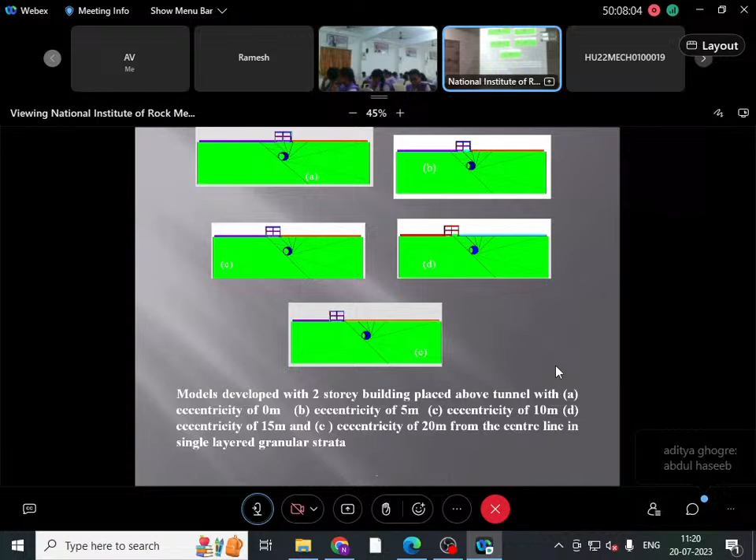To 7 meters a tunnel is passing through, so problems are too many. We need to assess whether the tunnel is going to stand, or the structures above the tunnel on the surface are going to stand or not. These are the issues wherein we need to divert little attention and then do something.

Without numerical modeling, nothing can work in civil engineering designs nowadays. So I expect my civil engineering colleagues in GITAM, and mechanical also, to now divert towards research in taking up projects using numerical modeling approach. Every project, every consultant in India is using numerical modeling for designing the structures.

You can find that some 3DEC there. This is the most advanced version of distinct element modeling software. I think NIRM is having it, and then we at NIT Surathkal got it. I think more than a dozen MTech projects were produced and 3 PhDs or so were produced on this. NIRM continuously uses it, and they generate crores of rupees worth of consultancy.

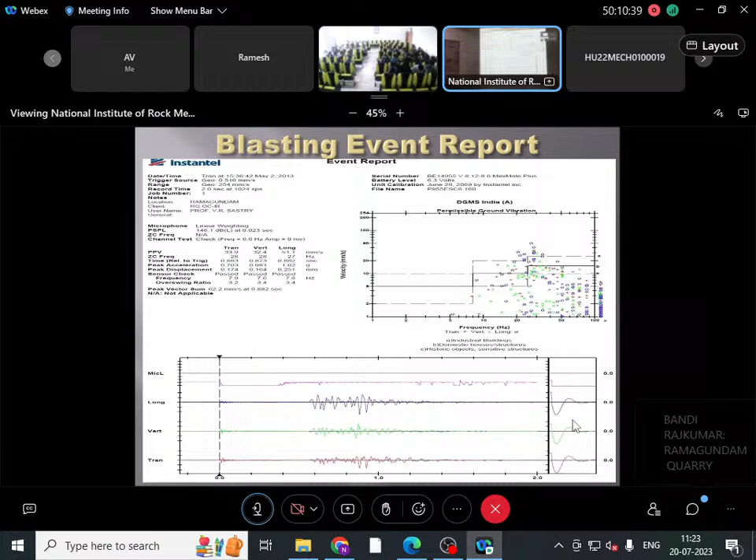How to control? So stability of the structures, or protecting the structures from ground vibrations generated, is a big area of work with huge consultancy potential. We have been working on that for the last almost 3 decades plus.

Now another area is how much energy is going to be generated by these vibrations. Can some energy be generated and stored to run your computer systems, at least in the organization, from the vibrations? We are working on that based on piezoelectric based electric generation, power generation.

The next one is high speed videography, because when you talk about a blast, everything happens in a fraction of a second. But everything also happens within that fraction of a second, and that may be good, that may be bad. For your information, I will just give one example.

In some of the mining projects in Northern India, Northern Coalfields Limited, one single blast - you see in movies, no? In the climax, villain wants to blast the structure or factory of the hero, and somehow hero does all the fighting, and at the end of the day he stops the blast. With the press of the button of that exploder, you are going to execute a small amount of plus 1.5 crores only. And the bill of explosives of Coal India Limited alone, one organization, exceeds 10,000 crores a year.

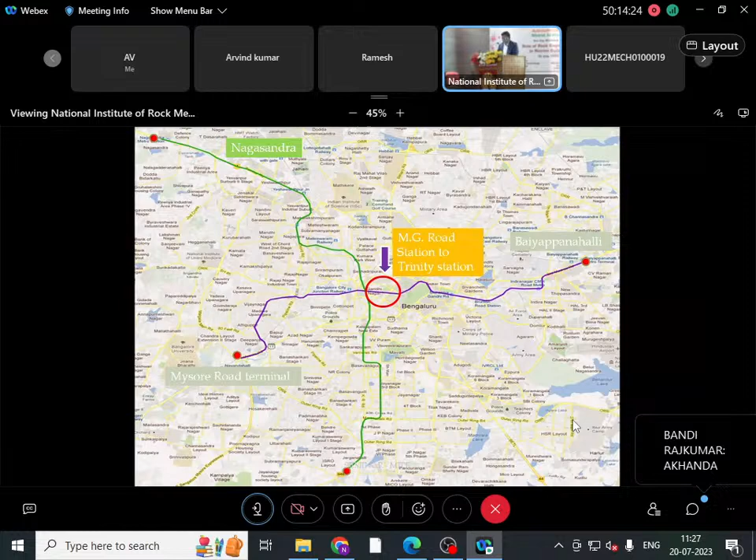This is Hindustan Aeronautics Limited building. On one side you have the HAL building. On the other side you have GPO, General Post Office, constructed by the British, which is declared a Heritage Center, a masonry structure. Excavation was done to construct the underground metro station.

One more piece of information I would like to share is that all the metro stations in Bangalore have a different design. No two stations will be of similar structure or similar design. The general architecture, how it should look outwardly, was designed by students from engineering colleges in Bangalore.

BMRCL floated a competition, and students gave the design for how it looks outward. So that is where we are progressing, how we are progressing in the country.

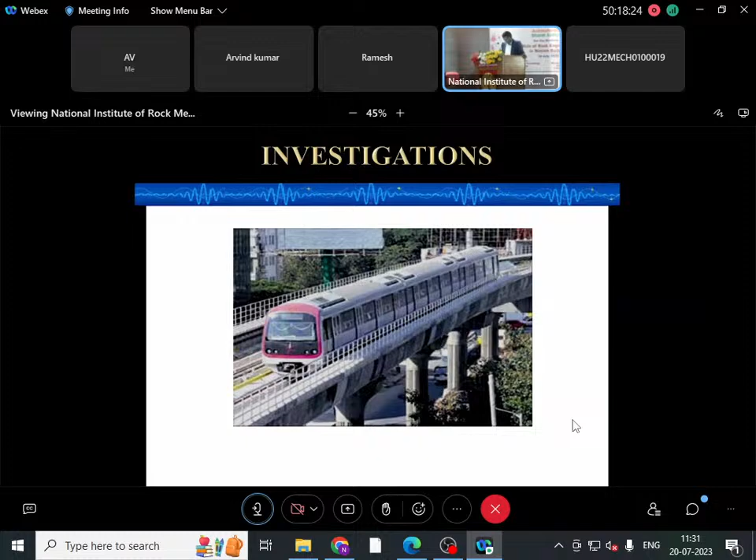And Munnar, everyone knows for something, but Munnar holds one of the toughest hydroelectric power projects, wherein maintenance of the slope is a big problem. NIRM was involved; 3 times they had to change the direction of the tunnel. Almost 600-700 crores has gone down the drain. Root cause: we don't really have the expertise to deal with the problem.

So friends, numerical modeling, these are some of the problems. Then when you come to the port sector, all the ports are going for tremendous expansion, deepening of the ports. If you have more depth of water, you can invite large capacity ships. One of the pet projects of the present government is to expand the ports.

When you go for expansion, you have to excavate the material. If you encounter rock mass, you have to blast, and we blast from a distance of 2 to 3 meters. Below this, there are piles supporting the structure. So 2 to 3 meters from the structure, blasting has to be done, protecting the structure, which is worth around 350 crores roughly, per structure. So the stakes are too high, and we don't have experts—only some 2-3 experts are there in the country.

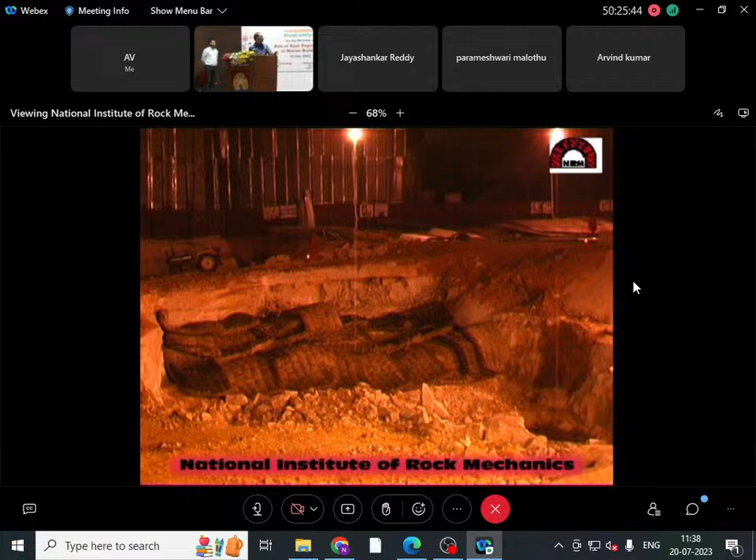This is called controlled blasting. Split.

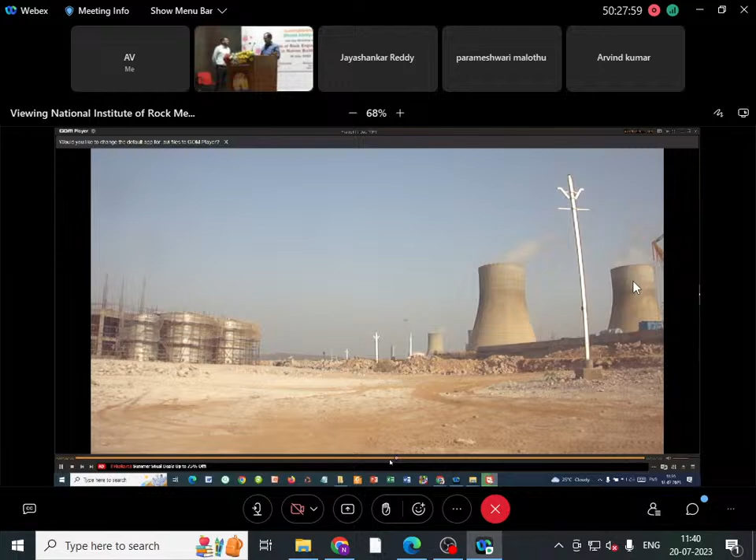This is at a nuclear project in Rawatbhata, Rajasthan. This is a specialized blasting called pre-splitting. Result of the pre-split.

Now the blast, what I said, pre-split blasting, there is nothing like you need to see any rock movement or anything, but this is how it has generated a crack within this. I will show you the result in my lecture. That means it is only creating a vertical face without damaging any rock mass, so that we have 15-20 meters of vertical face. This is a specialized blasting. This is how a crack has been created—even the blast hole has not been damaged. So this is one form of controlled blasting.

So rock blasting, I will take up, probably another half an hour to 35 minutes—rock blasting, a tool for development.

Now what do we mean by development? Development is something which can create a resource for the sustainability of the nation or an individual. Here, I have shown you the Chennai airport—the Indigo aircraft standing at the Chennai airport, this is probably 1.5 years back. The adjacent building is where we have done control blasting, and then this is terminal 2, which was inaugurated about 3 months back by our Honorable Prime Minister. That means airports are constructed, your travels are enabled when we do excavations, and excavations are done through hardcore blasting.

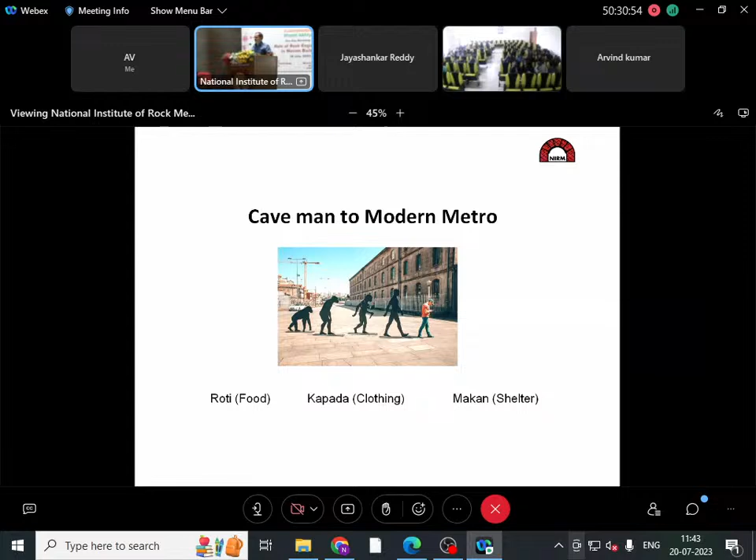Now what sustains society or the nation, broadly I have put it for you, is mining and agriculture. What cannot be grown has to be mined. So mining sustains the society, and to sustain the mining, to build the nation...

It enables you people to make your software. Those in computer science or electronics make the tools, ADAS devices, to put on your car, which is made of metal, is what sustains the society. Health, education, knowledge, information and data.

Today education is the last one, data is the first one. The priority of every individual is analysis and handling of the data. What kind of data is of no relevance to us? Infrastructure and energy. This gives us...

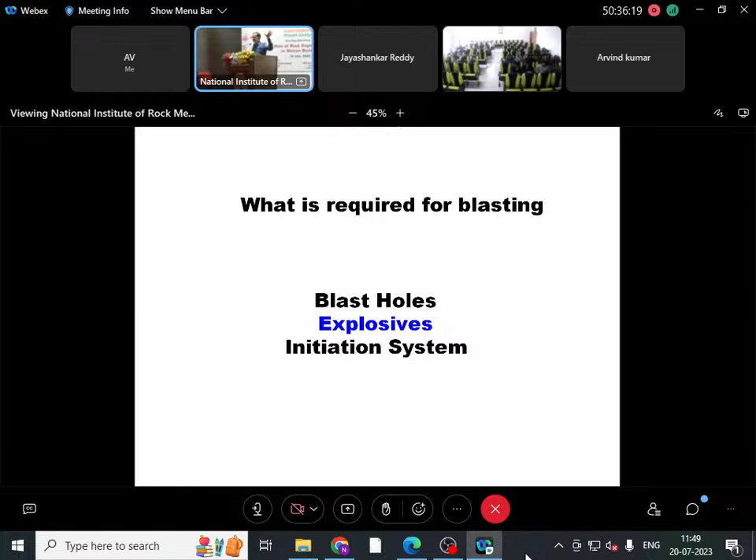So these are the three requirements: you need to have a blast hole, you put an explosive, you need an initiator to trigger it. Once having got these three things, the small thing you have to look at is the distance you have to keep that blast hole away from another, called the burden, spacing and the bench height. These are the terminologies, I am not going to go into detail. So this is called the design aspect of the blasting.

Now for this is a mining slide. The entire blasting has been put in these 4 slides. If you have a blast hole, you can have a blast hole diameter of 38 mm up to 311 mm. If you imagine a 311 mm blast hole, the explosive that can go into a single hole of a 40-meter bench will be almost around 1.4 tons. And if you are blasting almost around 100 holes, it can be more than 200 tons of explosives at a single time. So this is the size of blasting that we handle in India in the mines, and in a small project, as you have seen in Bangalore Metro, that is all 38 mm diameter, we are using 1 kg, 2 kg explosives. I will not explain more into this.

I don't know, online audience, if there are mining people, they will miss it.

When you do blasting, what are the issues that come out? The issues are design issues, that people will say the cost of blasting is high, that is an economic issue. The other one is technical issue. We are having huge boulders which are not able to be further used down the line, that is one part of the technical. What is the other issue? The adverse impacts. Whenever we do blasting, one is techno, economic, social, environmental, legal. This is where we spend a lot of our time in convincing when we do the blasting.

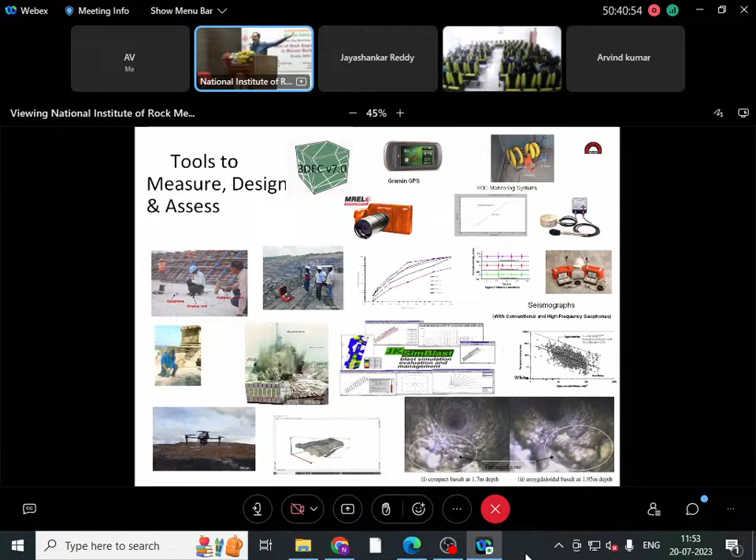How do you tackle this? Like all of you have computers, we too have computers, we too have tools, we too have electronic engineers working on this. These are the gamut of instruments that we use. I have shown the entire system of tools which we use. We understand the rock mass by having the sonic velocity of whether the rock or the concrete. We have modeling softwares, distance measuring units, high speed cameras, fragmentation analysis tools, vibration analysis tools, explosive analysis tools, air over pressure monitoring systems, and we do have empirical and numerical equations to come out with results. We have got borehole cameras to see what exactly the crack propagation is. We have got three-dimensional analysis, and then we use drones to completely capture the blasting in real time. So it is a matured engineering field. Rock blasting is not something where you just put an explosive in a hole, connect it and blast it. All this goes behind it to come out with a successful blast design.

Now this is how we monitor it - it's a hardcore blue collar job, it's not a white collar job. You have to be at the field, you have to take a lot of dust and heat in the hard helmet area. Now I'll show you the learnings.

So there is something called the stemming length, stemming material, and the initiation system. These are the technical things we consider when we design a blast.

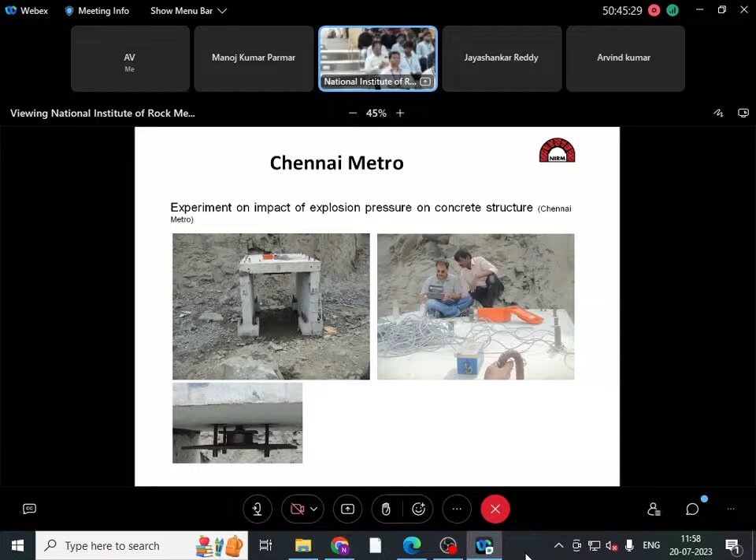Now, when I said that the effect of vibration is there, there are certain standards we need to follow. When you do blasting, we generate a calculated intensity of vibration. We say what is the permissible limit, our design will incorporate, and it will not generate more than that intensity of vibration. So that we call charge per delay, which we control and use.

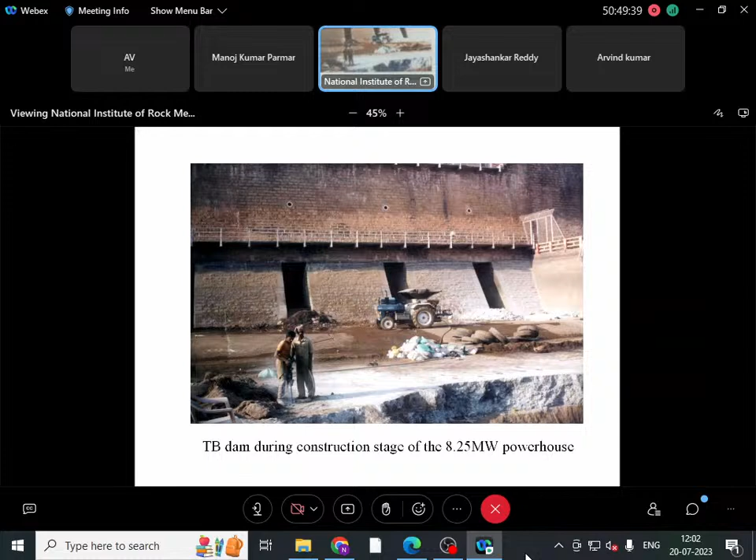This is in Bhutan. It is a 1020 megawatt Tala hydroelectric project. The cavern that Shastri Saab showed, the orangish one, the big cavern, is from the Tala hydroelectric project. And this is the dam of the Tala hydroelectric project.

They wanted to augment 25 megawatts more. Each megawatt of power generated today costs almost 7 crores per megawatt. So if you have to generate 25 megawatts, it comes to around 25 into 7, around 200 crores. But we spent only 25 crores, and another 25 megawatts of power was augmented by making a tunnel on the abutment of the dam itself. This is the dam abutment. On the abutment of the concrete dam, we have done controlled blasting.

This is the Punatsangchhu hydroelectric project in Bhutan. There was a huge fall, almost 190 meters, and almost 2 lakh meter cube of rock mass collapsed. Now there is no access to this. We created an access from the top, from an alternative route, and then completed the project.

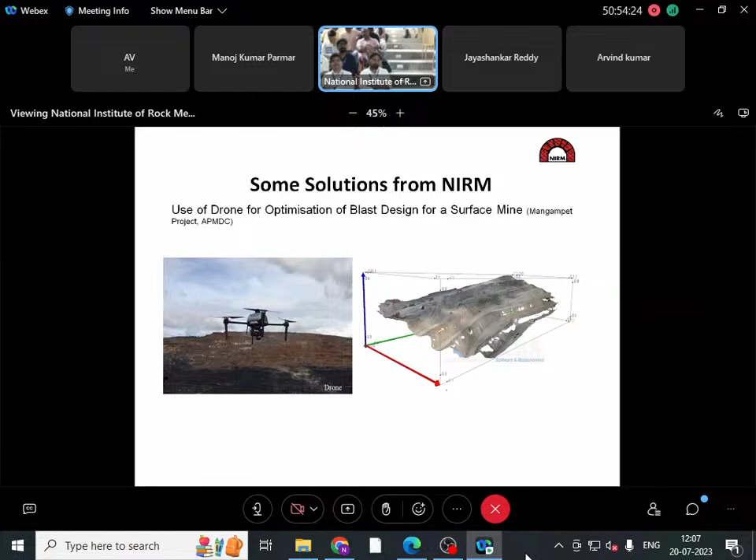What to do? I am talking about 2002. We thought, can't we think of pop shooting? Pop shooting means you place an explosive abutting the choke, it will blast and fall down. But it's risky - you have to climb into a 3-meter hole. We don't know what is going to come on your head, but who will take the risk?

Then we said, projectile charge. Why can't we think like army people, when they project it, it can hit it. So we can devise a projectile charge. We thought about it. The other option was drilling from the shaft bottom, or creating a new access.

We did not, like how Dr. Venkatrama has said, fear the failures - we make it a learning. We said, okay, this pop shooting has failed, let us attempt the projectile. So there is something called in blasting where you have a charge, a shaped charge.

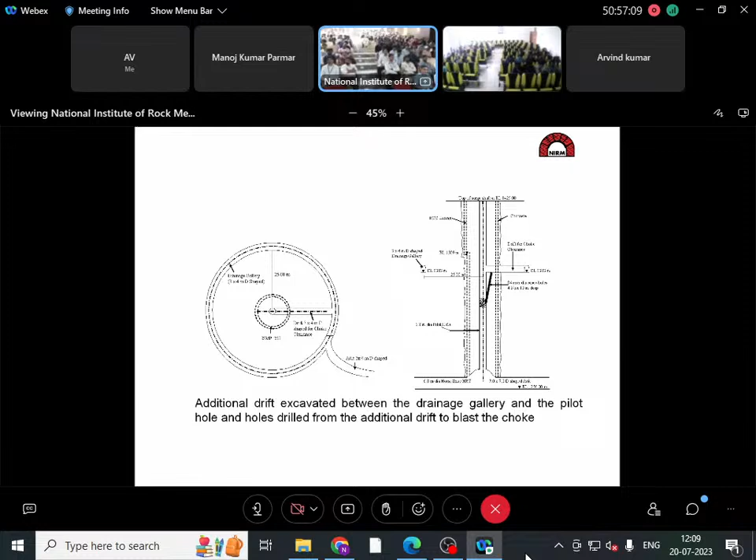Then we decided there is a drainage gallery like a tunnel access. From that you drill 100 meters and then address the blockage, because the entire power project of 5,000 crores rests on opening this choke, or else the project fails. That also was a difficult proposition. Finally, we identified an intermediate location, made a tunnel of 25 meters, went directly at the choke, put the explosive and blasted.

Now there is a heritage temple, Kumaraswamy temple, near Bellary, Hospet, where iron ore mines are located. Iron ore is a resource we have to judiciously use. Since there is a temple nearby, there was a Supreme Court judgment that within 2 kilometers of the temple, no blasting should be permitted. We said it's a national resource - if we can protect the temple from the blasting, what is the problem? So we conducted experiments, and today permission has been given up to 600 meters from the heritage temple, which is 1,000 years old. The temple is now safe and the mining is going on.

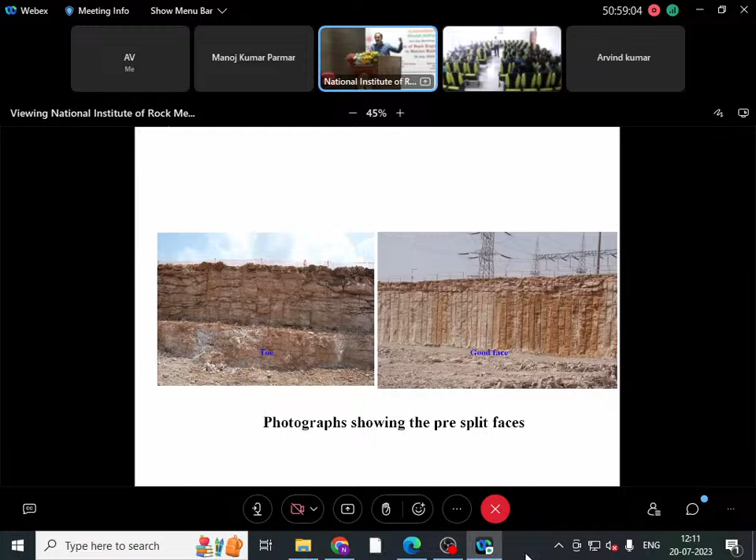This is the pre-split. The advantage with this is that if you have an angle of 70 degrees, the extra rock mass which has to be excavated will be almost around 8 lakh meter cube. Where do you dump that extra material? So to give a vertical face, you need a specialized blasting technique - pre-split is what that is.

This is one more experiment in Karnataka, near Hospet. There is a railway track going on top, and underground you need to make a tunnel. The cover is almost 14 to 17 meters. There was almost a 6 to 7 hour traffic jam with no solution. The railway people said they don't permit tunneling because their active railway line is going on, and the government was not interested in constructing a flyover. This was a logjam.

Then we convinced the railway people, saying we will do tunneling below this and will not generate vibration intensity more than what the trains generate. Trains also generate vibration - if you permit that vibration, why not permit blasting? They said, how do you prove that? We said we will monitor the train vibrations. We mounted sensors and monitored for almost a week, creating huge datasets.

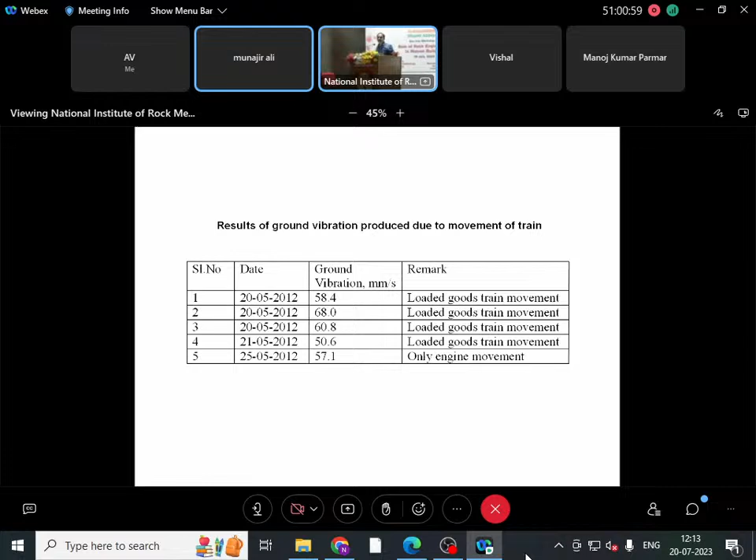The maximum intensity of ground vibration produced by trains was 58.4 mm/s, 68 mm/s, 60.8 mm/s, 50.6 mm/s, 57 mm/s. We said that with blasting we will not exceed 40 mm/s. Yes, done.

After that, every blast we used to monitor the level on top, checking for any subsidence or sinking because of the excavation below, since at a shallow depth of 14 meters this is a critical condition. We have all the data - the tolerance level we maintained was 0.005 mm, with the RL at 57.165 meters, and 0.005 mm is the tolerance limit at which we were working.

And the deformation measurements in the tunnel we have monitored. And finally, this is the blasting methodology we have used. Stage 1, that is the heading, side slashing, and then benching.

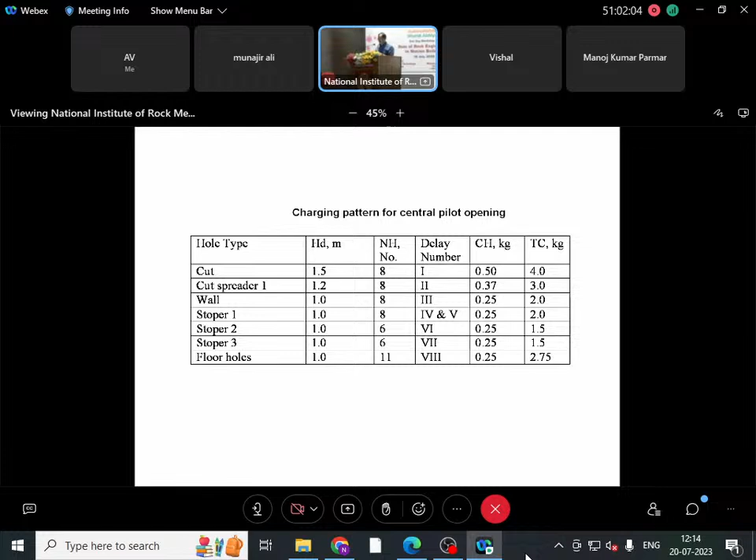These are the blast designs what we have used. These are the delay intervals given, delay number 1, 2, 3, for long delay we have used. The charge per hole and the total charge is given. The cut holes, spreader holes, stopers, floor holes, and final, this is how it started.

This is how it has progressed under the railway line, and today this is how the tunnel is completed. This is how the tunnel is completed.

I think Dr. Jha, I said 12:15. I rushed the slides, and thank you.

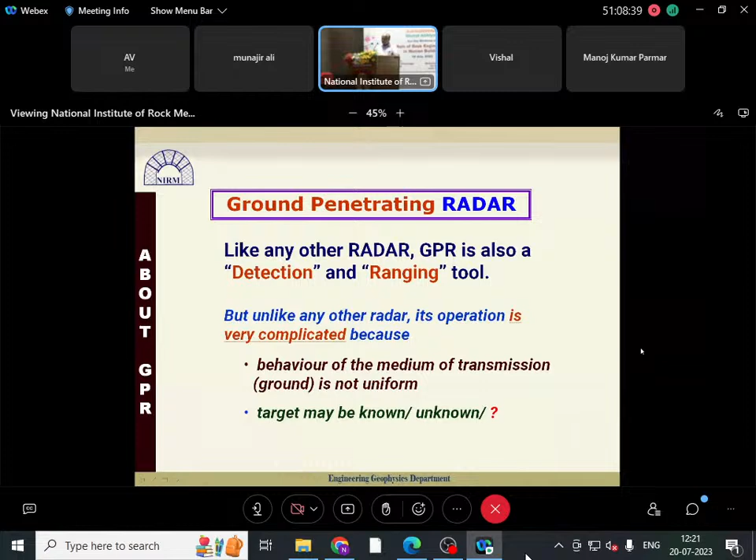Today it is one type, it has rained yesterday night, whole night, and today also it is raining. What data we got yesterday with GPR will not be the same today. The question here is, when the medium is changing like this, what can we detect? The anomaly is introduced by the medium itself, and now we are going to detect the target. That's what makes it complicated. But despite all these complications, we have to use it because it is a tool.

In geophysics, GPR is essentially an electromagnetic tool of investigation. Like any other electromagnetic tool, it has a source, that is a transmitter, which is an antenna. Then we have a receiver, which is a frequency-tuned coupled electromagnetic antenna pair. And we have a data recorder, essentially a PC, which records the normalized strength of the signal and the time delay over the transmitted signal reflected by the target.

So we are sending a signal and recording it back. What is the delay between the recorded signal and the sent signal? We are recording that delay. What is the loss of amplitude between the sent signal and the recorded signal? We are recording that as a normalized output. So these two things we record, and based on that we do the entire interpretation.

So where is the complication? It is all introduced by the ground. The ground distorts and modifies the incident signal, because while reflecting it, it makes the target blurred, since the ground is changing. Then there are some types of ground, like shale or clay, which absorb the signal, and then nothing reflects. So it becomes opaque, and we cannot work with GPR. We say GPR has failed, target is not detected.

There are also some targets like RCC or metal sheets which absorb the GPR signal, and there too the target becomes opaque. So these are the problems we face when we work in the field, and how we overcome that I will discuss here.

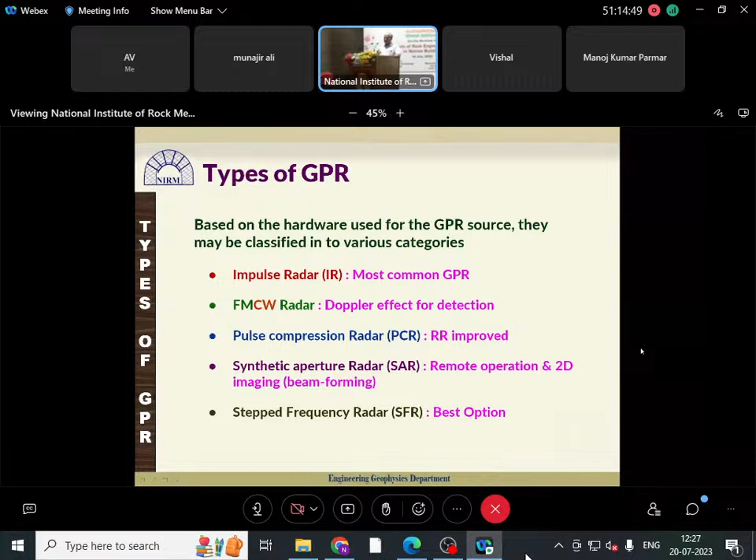Apart from that, people design radar as and when it is required. So what is the advantage of step frequency radar? Most of the limitations seen with conventional GPR are overcome with it. If we go through the literature, they say it is the radar of the future. But what we call the radar of the future, we acquired in 1995 at NIRM. Its hardware and data interpretation are difficult, a bit complicated.

The key to success of step frequency GPR lies in the design of high performance antennas which have ultra wide bandwidth with quick ring down characteristics - the design of the antenna, ring down characteristics, and ultra wide bandwidth. So if we carry one antenna itself, it will give me a range of 30 megahertz to 200 megahertz, which is not possible in impulse radar. That is the beauty with this step frequency radar. The ring down characteristic is very good, meaning it couples with the ground and gives me the signal in all possible cases.

The operating principle: we have a transmitter antenna and a receiver antenna. The transmitter antenna sends the signal into the subsurface and the reflected signal is picked up by the receiver antenna. Multiple reflections are picked up and data is stored in our computer and then displayed.

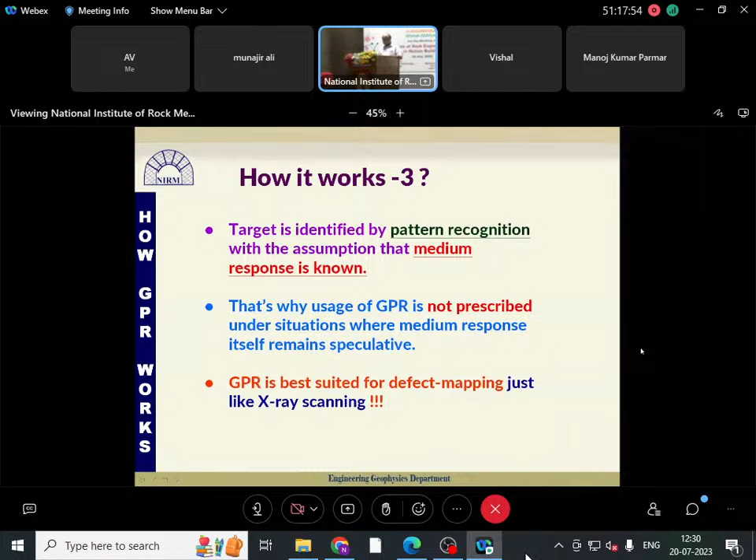The second problem comes with transmitter receiver coupling in GPR. This has varying subsurface conditions that lead to the success or failure of GPR. What happens? I have a practical example I will tell you. In this particular case, I had some survey work in this GITAM campus.

I had come when we had planned and said we will come. When I came here yesterday, it had rained. Now the GPR which I had planned will not work because the ground has become conductive. In this particular case, it will lead to failure. Now the question is, if I am an expert, I can still bypass that defective part and use the signal and come out with an answer.

But if you come with a conventional radar, it will definitely fail because the signal will not go beyond 5 meters depth, because for 6 hours it has rained - the whole area is drenched, nothing will go through. But if we bring an SFR, we can change our coupling frequency and get the answer. So that is where the TX-RX coupling with varying surface conditions is the key to either success or failure, both.

So antenna pattern varies with relative permittivity of the medium. It is expected that electrical properties of the subsurface should not affect the antenna performance, but that is not the case with impulse radar - it affects it. For effective coupling in the ground, good impedance matching is essential at the antenna and surface interface, which is possible only with step frequency. And this is often ignorantly ignored.

Why I am saying ignorantly ignored is, we start using GPR in all conditions and we do not get an answer, and come back saying GPR does not work.

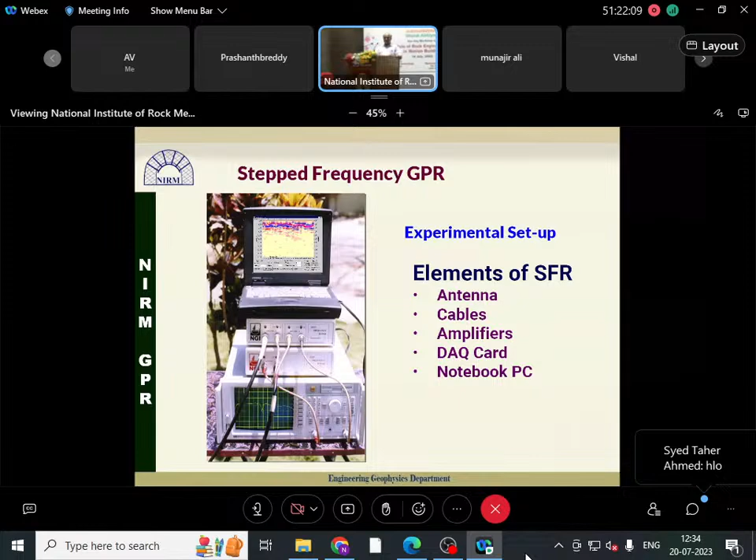This is the software we are using where we can define frequency steps, IF intermediate frequency, FFT nodes, everything we define, and then we get the signal and invert it and we get the section. This type of signal we get. So because of the tuning capability, I repeat, because of the tuning capability, this radar has never failed.

As explained earlier, ground conditions modify the radio signal. The GPR antenna tunes for different conditions in different ground conditions. Since source and receiver are independent of the antenna in our model, the antenna is an independent passive element, there is no coupling with the source, there is no hardware on this. So we always change frequency depending on the ground condition.

So power can be enhanced externally. So NIRM GPR performs in all conditions. If at all GPR survey is possible, we will come back. If we are not able to do it, nobody in the world can do it. I can assure that.

So how do we do GPR survey? We have bistatic survey where we have transmitter and receiver antenna at separate positions, and we keep moving along a line of survey with the same separation. This is called profiling from surface with bistatic antenna.

Then we can do vertical mapping, for example railway pillars we have to do vertically. So we keep the transmitter and receiver antenna separate, and it maps vertically down at the center of the antenna. So we can map the defect in the buried pillar. That is called the sounding method.

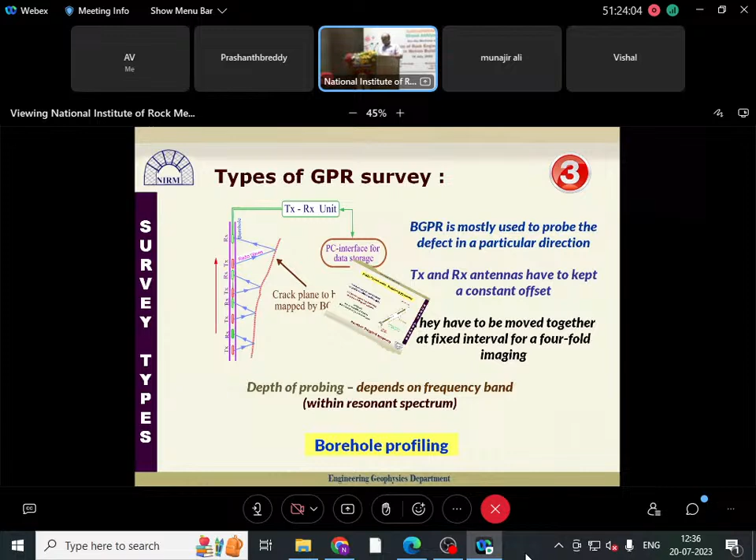This is what we have made, guided mapping, where we have given a 30-degree angle only for looking. So if a crack is there, we can see the crack and we can map its profile through the borehole.

So from survey types, we can do profiling and sounding from the surface. From borehole, we can do profiling and guided probing. And if we use 2 boreholes, we can use cross-hole tomography. We can do non-parallel borehole tomography. We can do 2D survey. We can do 3D survey. All types of survey we are able to do.

Coming to tomography, this is another concept brought from the medical field into geophysics. CAT scanning is computed axial tomography, which we use for brain scanning. Here tomo means slicing and graphy means imaging. So both combined becomes tomography. Here we can do imaging in the time domain or we can do imaging in the frequency domain. Both we can do using GPR.

And here at NIRM we have developed a tool called monochromatic tomography. We call it frequency domain attenuation tomography, where we use a single frequency, and we can enhance the target. The target which was opaque, like we have 7 colors of light, if we use one particular light, it will enhance. So we can use a particular frequency to enhance the target, and we can make it, which was opaque, bright.

So here I am giving one example. We have a target buried. We have 2 boreholes here, one transmitter, one receiver.

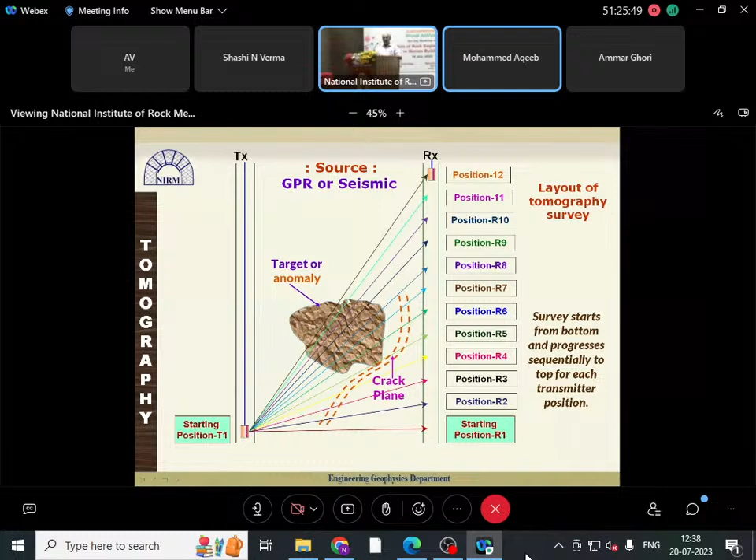So one by one, this receiver is moving in one position, then second position, then third position, fourth position. This transmitter is sending the signal and the receiver is receiving it one by one position. Like this, it keeps receiving till it comes to the top. So if you see, the target here is traversed by 10 to 12 waves. So next set, we see this position is 12 waves, then second position again 12, third 12, fourth 12, like this we keep on doing.

So the center position of the borehole is scanned 12 by 12, that is 144 times. This target is illuminated, we think, by 144 waves. So we invert all the 144 transmitted waves together and then we get the picture. And what picture we get will be here, it will be like this.

So it is a velocity tomogram. We are giving the velocity picture. Same if you give attenuation, we will get the attenuation tomogram picture. Picture is blurred depending upon the contrast between the host and the target. How much attenuation contrast, how much velocity contrast there is, accordingly the picture will appear.

These are our antennas, step frequency. Now you see it is just a fiberglass antenna with the elements loaded with resistance, and we have a plastic pipe as handle. We connect it to a cable to our transmitter receiver, and it becomes, this is hardly, it will be half a kilogram each.

And this is a 50 megahertz antenna, supposed to give me 30 meter penetration for 50 megahertz coupling frequency. But I have used this antenna for 200 megahertz as well as 20 megahertz, depending on the ground condition. We can always tune and check and use it.

We have different types of antenna. These are shielded antenna, where back scattering is shielded and we can use in covered space like this room, tunnel, everywhere we can use shielded antenna. So as we increase the center frequency of the antenna, the depth of penetration starts decreasing.

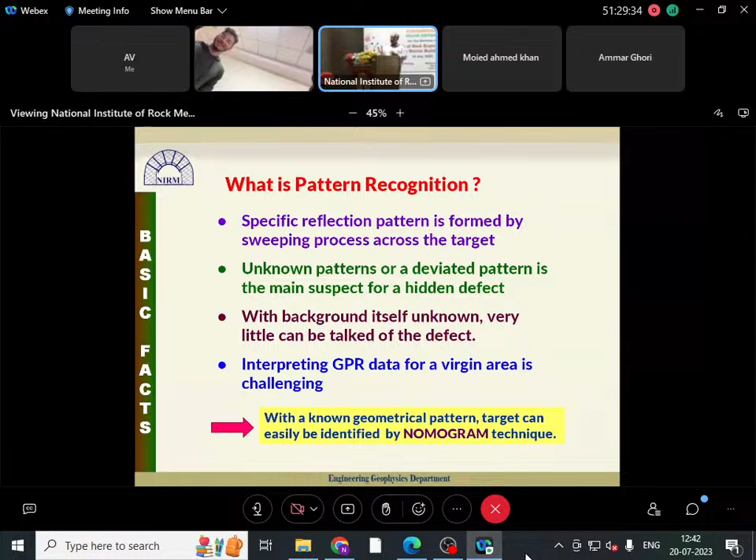So if we know how the pattern will look like for a cylindrical pipe, a spherical pipe, we can match - okay, this anomaly is matching with a cylindrical pipe, so the object is cylindrical. This is matching with a spherical pipe, this could be a spherical object. This is a linear object. So if we have that, it's called the nomogram technique. If we know the specific pattern, we can match it. Otherwise, with our experience, we can say.

So it is like an X-ray, where we can distinguish the defect just by knowing how intact it should look like. GPR also will work if we know the intact condition. If we don't know the intact condition, interpreting GPR signal will be worse. It needs experience.

So where and why to use it? GPR is best used for defect mapping - that is, mapping a known target based on identification of specific geometrical pattern, guided probing which we have developed, and fast data processing makes GPR survey the most invaluable tool in troubleshooting applications. It needs proper training for operation and interpretation before use. It is not a plug and play system as yet.

So GPR survey may fail if the subsurface is totally unknown. If the medium is highly conducting, we have constant RF signal interference. We have clutter and subsurface reflections dominant. We have presence of multiple echoes in a closed space, and we have range resolution ratio compromised. I will just explain this.

What is range resolution ratio, I will give a slide or two on that. Then we have impulse versus step frequency.

Commercial GPR is an impulse model which we can buy from the market. We have hardware fixed on the antenna. The antenna is tuned for a particular frequency. We cannot change it.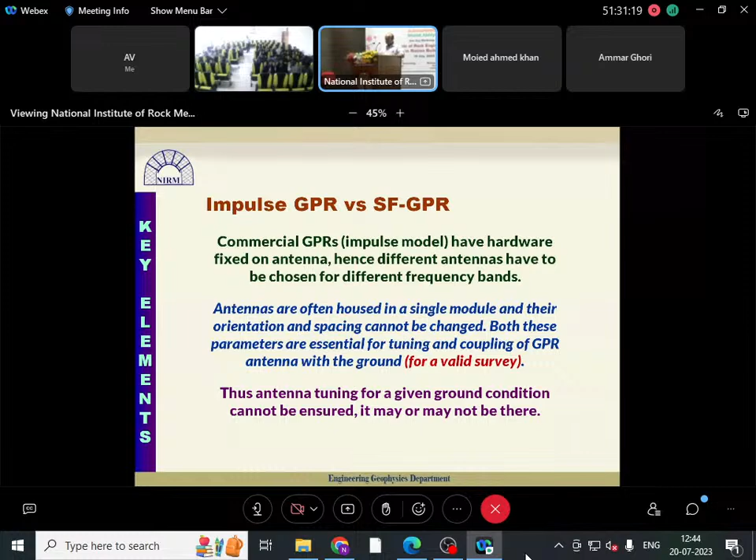So for a given ground condition, its performance cannot be ensured. It may not work in all conditions. Whenever antennas of the impulse GPR get tuned to the ground, it will work perfectly like ours works. But if it doesn't get tuned, it fails. Since there is no way to determine that the antenna is tuning or impedance is matching, performance guarantee cannot be ensured.

So commercial GPR, we call it a flip-flop model, but our model always works because we can tune ourselves.

Then this is range resolution - how deep to look into. The depth of penetration is governed by the frequency band of operation, what band we are using, dielectric permittivity of the ground, and the conductivity of the medium. There is no thumb rule. It depends on our experience, what frequency we should use and how much depth we should look into.

In engineering applications where mostly defect mapping like crack, damage etc. is involved, we use high frequency antennas above 500 megahertz, which is widely applicable. For reconnaissance survey, we can use low frequency antennas - 30 megahertz, 50 megahertz. Engineering defects in construction, we can use 250 to 500 megahertz, which will go to 5 to 10 meters. And for crack, fracture or tomography, we have 1500 megahertz, which is within 1 meter depth.

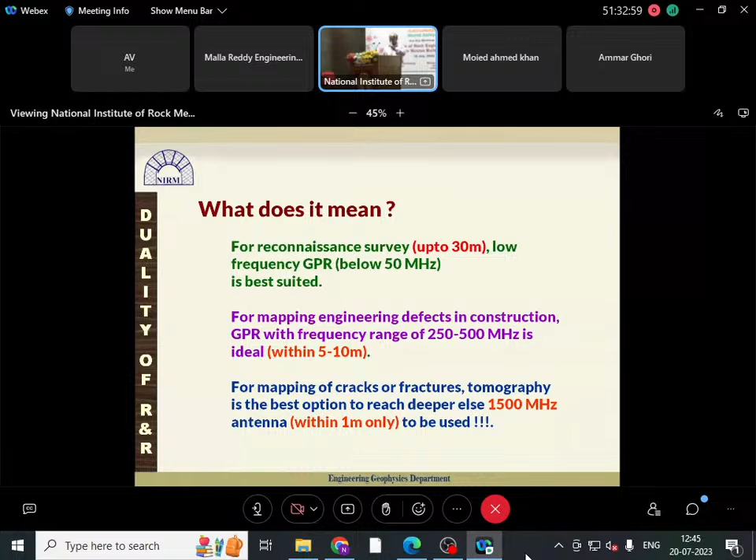Resolution is the ability to distinguish targets at various depths. Many times I have come across cases where in urban areas we have to map utilities - a cable or pipe is buried, and we map it with GPR. Then we say one pipe is above another buried pipe - one at the top, another half a meter down, then 2 meters down. How many can you detect? That becomes resolution here. Resolution is the capability of GPR to distinguish two closest events which are closely spaced to each other.

GPR resolution is velocity divided by twice the bandwidth. So if we increase the bandwidth, we can increase the resolution. That is the advantage with our GPR - we have ultra wide bandwidth, so our resolution is maximum.

I will give an example here. In impulse GPR, the trade-off is 1 by 10 - that is, if we are mapping 1 meter depth, our resolution will be 10 centimeters. If we are mapping 1 kilometer, it will be 100 meters. But in step frequency, we can give 1 by 100, 1 by 15. That is the advantage - 1 by 15 resolution we can give.

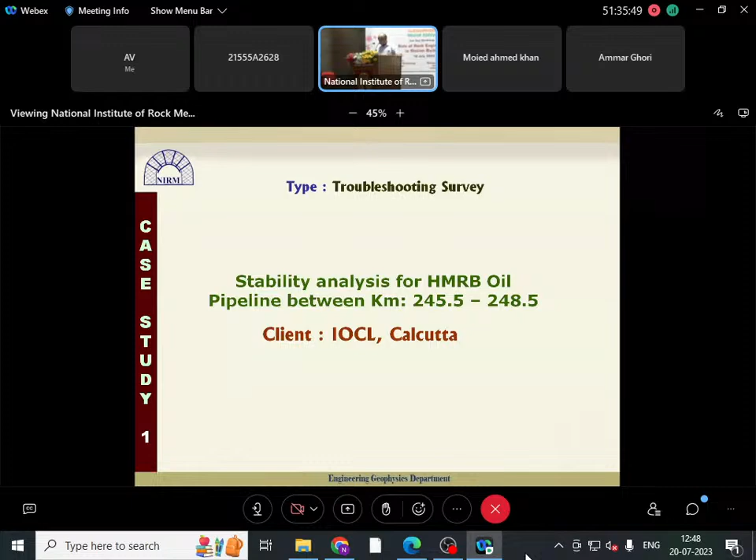IOCL was worried that if the pipeline is under the influence of this fire, it will become non-controllable. So they gave a contract to ISRO. ISRO measured from satellite and said the pipe is under fire - they see from satellite, not from the ground. Immediately the refinery was stopped and they were searching who will look into the firework.

No institution works for mine fire. So many such cases are there. If the moment they hear a mine is under fire, no institution goes, without bothering what it actually is. They came to NIRM. I said, let me see what it is. When I saw this, it was a pit fire - somebody was doing brick kiln work and this caught fire.

We investigated - this is the crack appearing on the surface after 4 days, and exactly on this line the pipeline was going. And we did this survey. You see, the same antenna we are using, we did this survey along the entire pipeline.

What we got is, from the surface we are getting cavity pockets which are reaching as shallow as 2 meter depth. So I said the ground is caving in and the effect has come up to 2 meters, and the pipe is at 1.5 meter depth. Anytime it can come down, so we have to isolate that zone so that it does not.

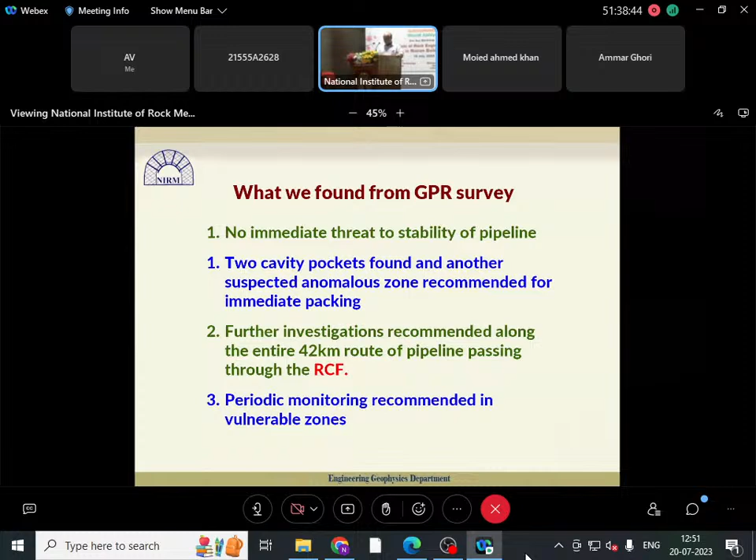The second survey I brought is for landmine detection at Chhattisgarh. This is a very interesting story. We got a phone call from the Governor of Chhattisgarh saying NIRM has the capability, and we have a repeated problem of landmine blasts in Dantewada.

Can we do this? First we said we do not do it, because the letter had come saying you have to do this, we do not pay for anything. I said we are not working under them, we will not do it. One fine day a call came - he said, I am the Governor of Chhattisgarh speaking, I want this. We cannot say no. We went all the way there, and they showed me these are the landmine blast sites.

The Governor, who was an ex-IPS officer, said he had buried some live landmines for us. We had to do the survey, flag it, and his bomb disposal squad would be there with us - they would defuse the bombs. The person who had laid the landmines would not be there to help us. Okay, we have to do the survey.

What to do? Then we started doing the survey. Digging was done at several locations so that we cannot simply say 'here is a landmine' - everywhere they had dug and left it, to confuse me. Then we did the survey in a grid manner over all the ground.

And all along this line we did the survey. We could clearly identify the sweep zone and the targets. When it was dug out, this was a plastic mine - they had buried the mine with a tiffin box and a plastic bag so it would not be detected by their metal detector. They wanted to know if GPR could detect it or not. All 6 mines we detected were defused by the BDS in our presence.

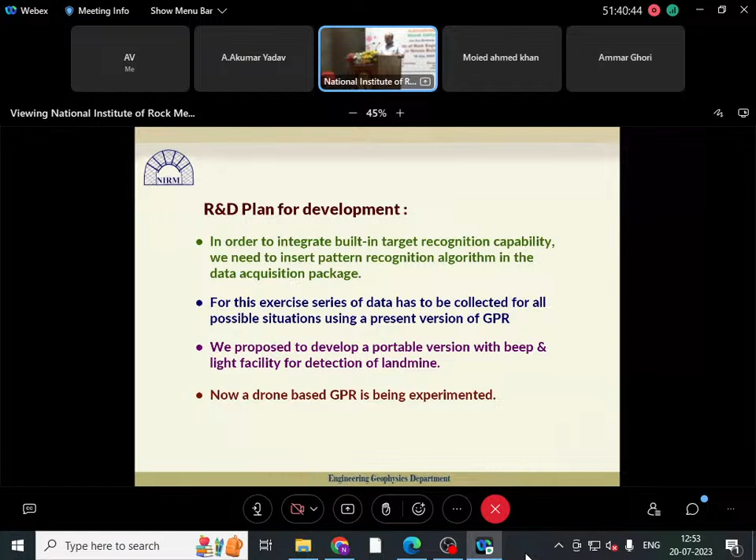Now they are procuring drone-based GPR for landmine detection, but the problem is still not solved, because the problem is still there. We want an automated system. We can do it with the setup developed.

The third case is archaeological remains. This is in Bangalore Metro, which is crossing between two iconic areas - Tipu Palace and Tipu Fort. It is between Vanivilas, lying between the historical archaeological Tipu Summer Palace and Tipu Fort. In between the two, this tunnel was going.

Our ASI said we will not allow the tunnel. Why? Because in this area, all the weapons are buried. Who buried them? Tipu Sultan died long back, but they say it is buried, we will not allow it. Then the tunnel has to go - the alignment cannot shift, the metro has to go.

They requested NIRM, we went there and surveyed. We identified 2 locations where there were suspected targets, and we said it should be allowed. For that we had to go to Delhi, present the report to ASI, and get the clearance for BMRCL from ASI. They cleared it, and the places we marked - this one is the Tipu Fort and this one is the Tipu Palace.

Wherever there was space, we used the same fiberglass antenna we are seeing. We mapped the pattern recognition clearly, and in 2-3 places we got the suspected pattern. If you see the newspaper, at this location they got Tipu-era cannons - 2 cannons were detected and kept in a museum. That was the agreement - if we get anything, it will be kept by BMRCL in a museum, they will not destroy it. That's all there was - that's why they were not allowing the tunnel.

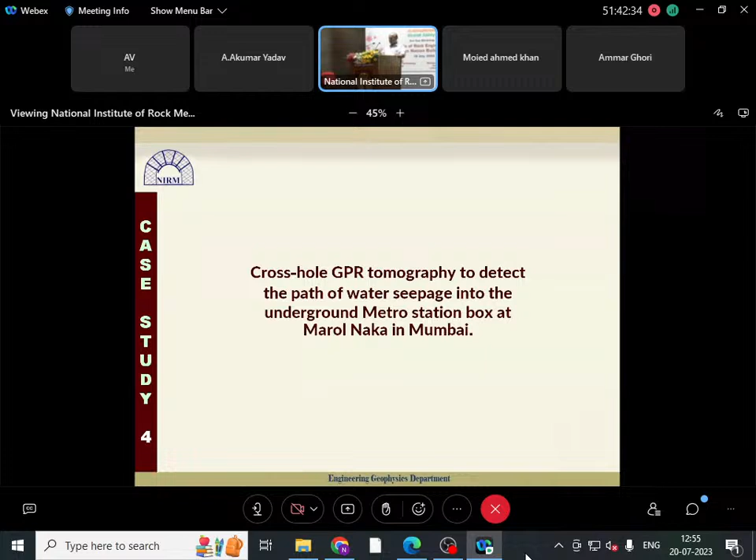Next case is from Mumbai Metro. Here in Mumbai we have a lot of water problems. In the Marol area, whenever they constructed a tunnel, continuous water seepage was coming. They did not know where so much water was coming from, because all areas have water scarcity. And on top, a metro is already running, while the bottom second line is being built. They had the idea that if the ground shakes even a little, everything will collapse. So all the pillars were being monitored, and they asked us to do a survey.

I said IIT Mumbai is nearby - why should we go all the way from here to Bombay? You can get it done there, we have a geophysics department. They said no, NIRM should come. We went there and did some cross-hole survey, because in Mumbai there is no place to do the survey - whole night traffic is there. We did some boreholes in the ground, and at night time we did the survey from 1 o'clock to 4 o'clock - only 3 hours we got the slot.

At night we did the survey, and we could map the damage - this water-infused zone. If you see the 3D picture, it clearly shows the point of leak, and here is the water cluster, and from here it is coming down. So what we suggested was that they put a blockade at this particular hole, they blocked it, and the water seepage stopped. Today this area is through, they have gone ahead.

L&T was doing the work, but the problem was they wanted a solution immediately, because it's a construction-related problem, and no other method would work - if we do seismic, it would damage further since there is a tunnel and a metro system running on top. If we use other methods, they would interfere - electrical methods would interfere too. So GPR was the best option, and we got it done.

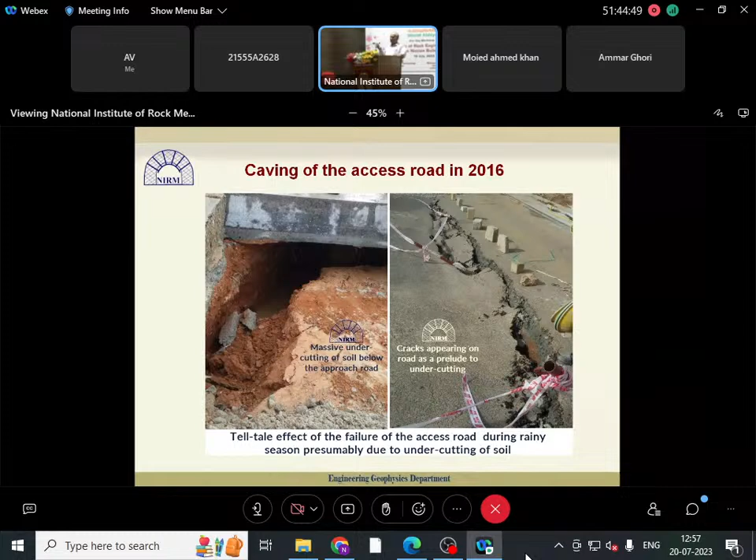We did the survey and found that in 3-4 pockets, the GPR survey showed that the water flow path was getting blocked. In the seismic survey and resistivity survey, everywhere we got the same result. So we said you should put a slotted pipe and allow the water to flow.

At 3 places where we gave this location, they allowed water to flow 24/7 like a fountain, and for the last 3 years there has been no damage. As simple as that. But where they ignored this and built anyway, every year it is losing value, because nobody wants to buy those flats. Big people had already purchased before construction, but after that we cannot go there. People have had to stay away from the house for 3 months because the road was washed away. That was the issue.

So these are cases where we have applied GPR. Next comes Vadnagar in Gujarat, where we had done GPR tomography. This is from the Prime Minister's constituency. Narendra Modi is from this particular village - his house is there. Whenever we went, people showed me his house. There is a board saying it is the earlier house of Narendra Modi. He belongs to that village.

The issue here is it is a Buddhist monastery site. When they dug, a lot of the Buddhist monastery site appeared. In the scriptures of Hiuen Tsang, when he came to India, he mentioned that all around this area Buddhists were living. So the Prime Minister wants to make a Buddhist circuit, and the Japanese government is ready to invest.

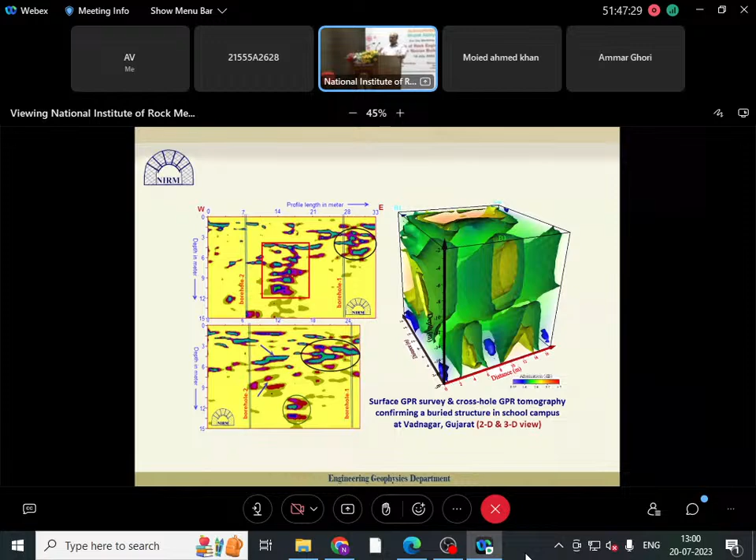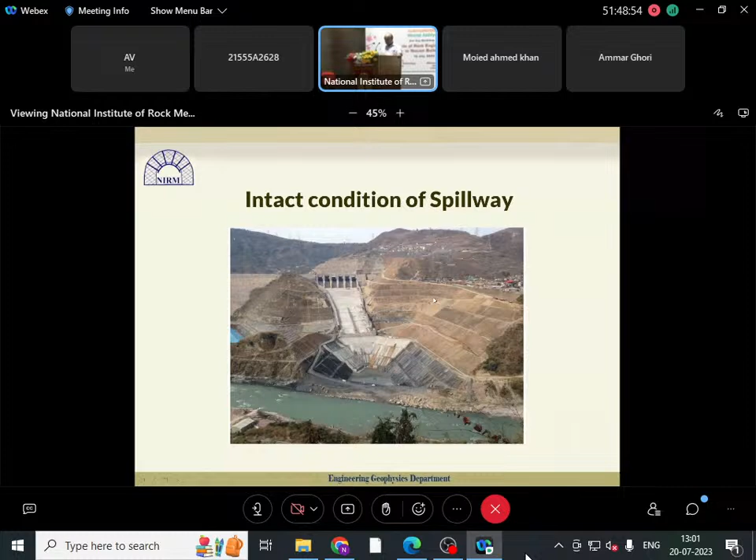This is the Koldam Hydel project in Himachal Pradesh, which comes under NTPC. When it was constructed, it was looking like this, but today the entire thing is washed away. This area, this spillway—if you see everywhere, cracks are appearing, it is collapsing, joints are opening.

They have put a crack monitor to see how it is moving, and today we are getting information that cracks are as wide as 30 centimeters to 90 centimeters. I don't know if 90 centimeter is a crack or an opening.

This is the situation, and they wanted us to do a GPR survey because any other survey would damage it further. This is an RCC platform with iron in it, so we cannot work normally there. All other companies have come and gone. We started working on that and gave them the picture. This is the area we worked on in this platform.

On this RCC platform we got all the damage zones wherever they were—weak zones, damage zones, crack zones—everywhere we have shown them. We marked all those in our section and finally showed the trend of where it is going. Nine clusters of anomalous zones were mapped, continuing down to the lower levels, 20 meters, 30 meters. So what we wrote is that the damage zone is not just from the surface, it goes further deep and is allowing water to flow.

Today we have come to know that water is flowing from the bottom. At that time we advised them to do a seismic survey and get it sealed. They ignored it, but today they are facing the consequences and have to take extra measures to protect it.

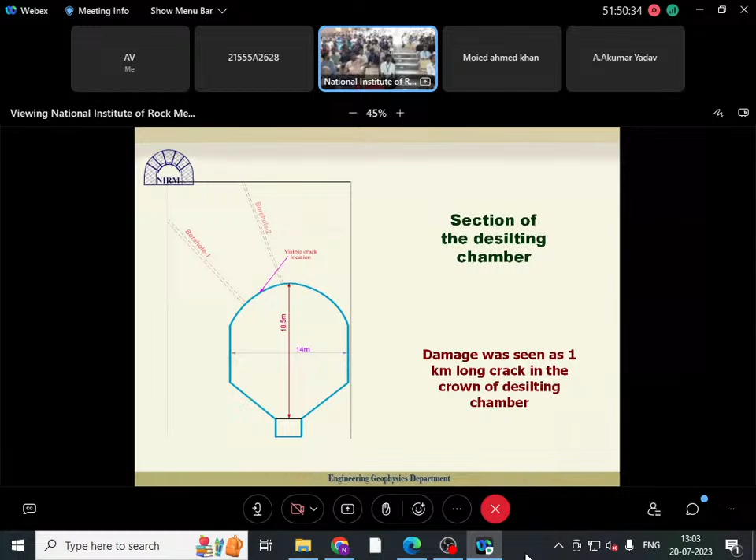This is from the Tala Hydroelectric Project in Bhutan, where we did GPR tomography in the crown area. Normally we work in the subsurface, but here we worked on the crown of a tunnel, using two boreholes to do mapping in the crown to find out the effect of a crack appearing there, how deep it was, and its effect on the stability of the tunnel.

When we generated the picture, we could see that this whole area is damaged—it's a plastic zone and fractured zone, and the crack is allowing water to flow in this direction. So we suggested that the entire roof of the crown had become a weak zone that needed to be stabilized. Finally they stabilized it and went ahead with construction. Otherwise this whole area was failing.

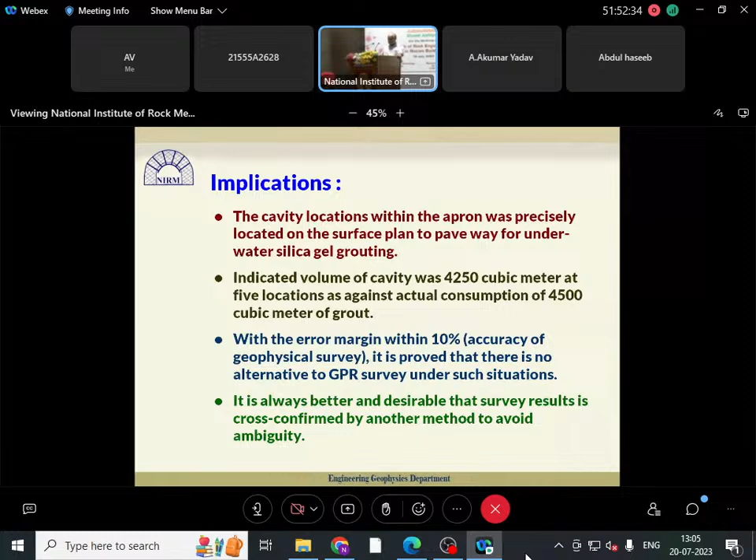This is from a Bangalore refinery, where we mapped with GPR survey on an iron tank pad. This is totally impossible—nobody can map through a 16 mm iron plate. We did the GPR survey, and here what we mapped was cavity pockets below the tank pad, which were allowing the tank to collapse repeatedly due to loading conditions.

When we mapped this cavity, it was grouted by IIT Mumbai. After grouting, they again asked us to find out whether the grout was proper or not, because as civil engineers we can only grout—we cannot say if the grout is proper or not. So we checked it again to see whether the grout was proper.

So like this, we have many more case studies. I will end here with our presentation. Thank you.

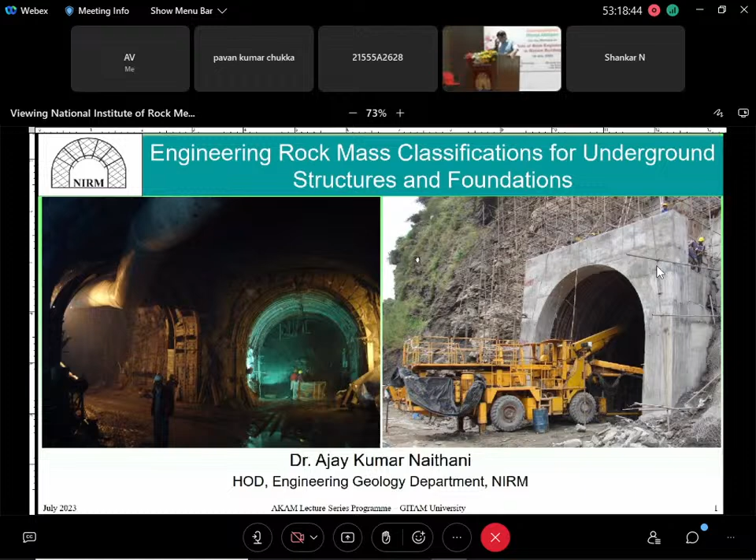So these two words, classification and characterization, are very commonly used, but sometimes people don't use them properly. The terminology should be very precise. Both have different meanings - the presentation I'm going to give is on the classification only.

What is the meaning of characterization? My previous speaker, Dr. Jha, told you about one tool of investigation in geophysics that we use. So many tools are there which are being used for the investigation of Mother Earth.

So what should be the definition of classification? Whatever parameters are being used, we are collecting real data from the site that is used to classify a rock mass. Now the question is, why is this classification required?

I am an engineering geologist, but in front of me there are civil engineers, mining engineers, and mechanical engineers who have a very limited idea about rock mass classification when we use a particular term. So what terminology should we actually use - this is a purely applied field.

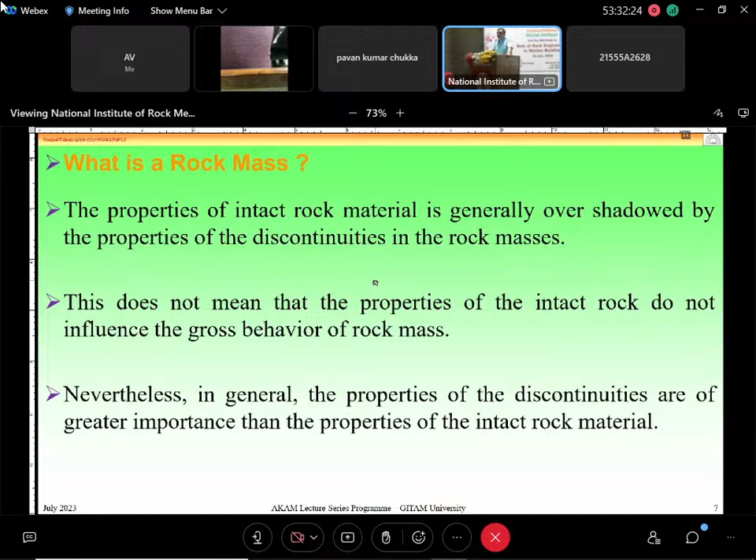Now you see how many parameters there are in this pattern and relationship. So there are different ways we can go for collection of data for rock mass characterization or rock mass classification.

Suppose I am having a tunnel length of 10 kilometers. How will you characterize a 10 kilometer tunnel? First you have to divide this 10 kilometers into different sectors, different domains, based on similar type of geological characteristics. After this, for each domain, you have to collect the data.

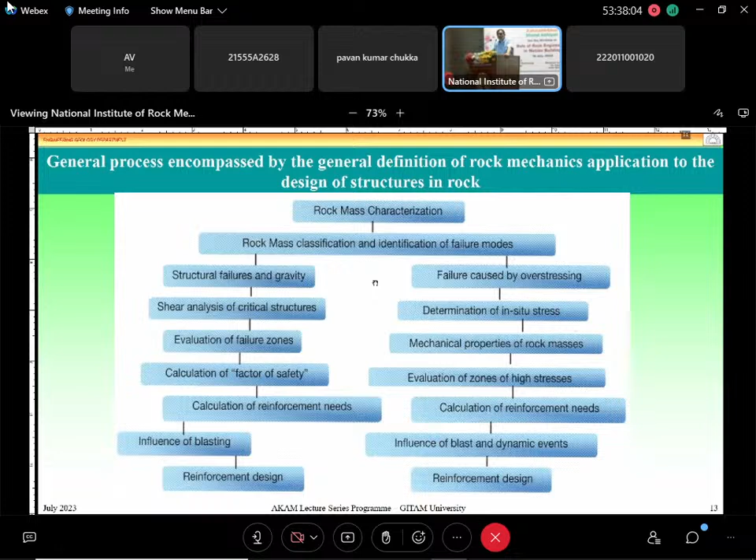Now these are the most important parameters collected worldwide for classification of the rock mass. Whichever classification you use, we have to know the strength of the intact rock. This should be very clear - whenever we talk about strength, it is the strength of the intact rock, not the strength of the rock mass. Only the intact rock, whatever we determine in our laboratory, gives that strength. Spacing is a very important parameter, along with the condition of the discontinuity, which I will elaborate on. Orientation is very important with respect to tunneling as well as for slopes. And groundwater condition is again a very important parameter, as I told you, affecting stability and changing effective stresses with changes in groundwater condition.

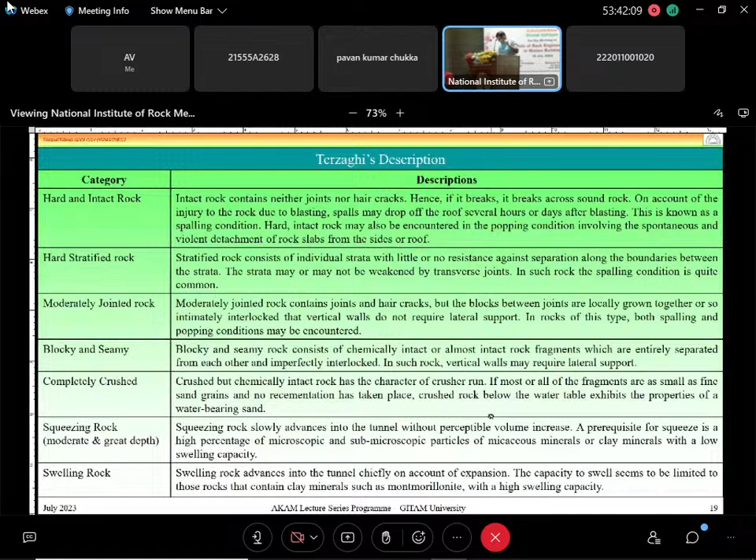What is being used? This is used to determine how much load actually comes, and where one should use this. Suppose we are making a tunnel open to the sky. Whenever your tunnel intersects some shear zone and you are unable to protect it in time, because the ground mass has a certain time it will withstand during excavation, that is known as stand-up time. After that time, if the tunnel is not supported, it will definitely collapse. So how much pressure is going to come, this classification can be used for that purpose only.

The rest of it is not being used across the world. Now this is a limitation, as I told you, because when it was proposed, there was no concept of shotcrete and rock bolt. Only one concept of underground support existed, regarding ribs in the form of iron support. So that time it was used. Later, when the concept of support changed, this classification stopped being used anywhere.

Now in the Lauffer classification, the important thing to remember is that stand-up time was first given by this classification, and later the modern NATM foundation is based on the Lauffer classification only. The limitation of this is that how much support has to be given for a particular rock mass classification is not defined or given in this classification.

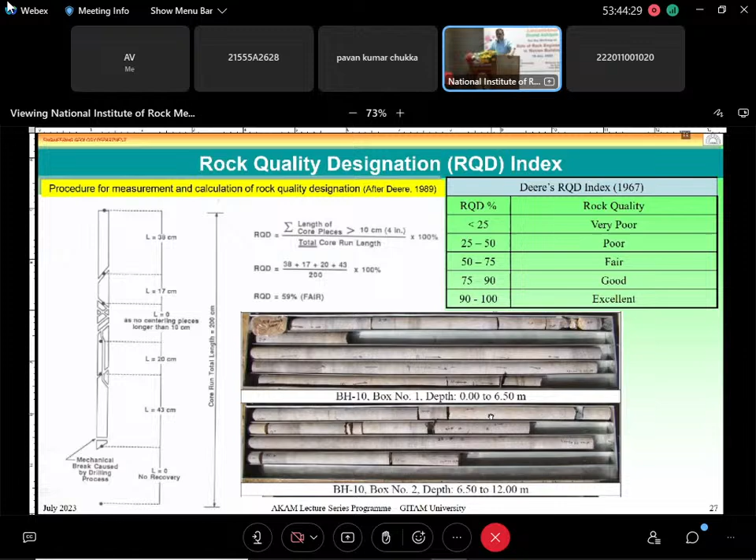Now this is RQD. This is important because worldwide this classification uses RQD. RQD is itself a classification, but this formula is given here, and it is used across the world. There are two methods to get RQD, rock quality designation: either from the borehole, or this empirical relation. From the surface, if you have the volumetric joint count JV, it is shown in this diagram, in this cube, how you count the number of joint sets.

If you count the number of joints in a one cube, that is the joint volumetric count, JV, then the formula given is RQD equals 115 minus 3.3 into JV. This is being used worldwide.

People are doing research, but from the practitioner's point of view, this empirical correlation is being used. For the first time, with respect to RQD, some support system was given, but it is still not a fulfilled classification. The limitation is that it is only a one-dimensional parameter, which cannot be used alone for classification.

Ultimately, we are thinking of characterization of the rock mass. If you are thinking of characterizing the rock mass, one parameter is not enough, but this parameter is very important for other classifications.

Now this is the RSR classification, that is the rock structure rating. This classification is not being used much now, but I mention it because for the first time the word shotcrete was introduced here, and how much load the shotcrete can take. Based on three parameters - geology, geometry and groundwater condition - the rock mass was classified by Wickham et al.

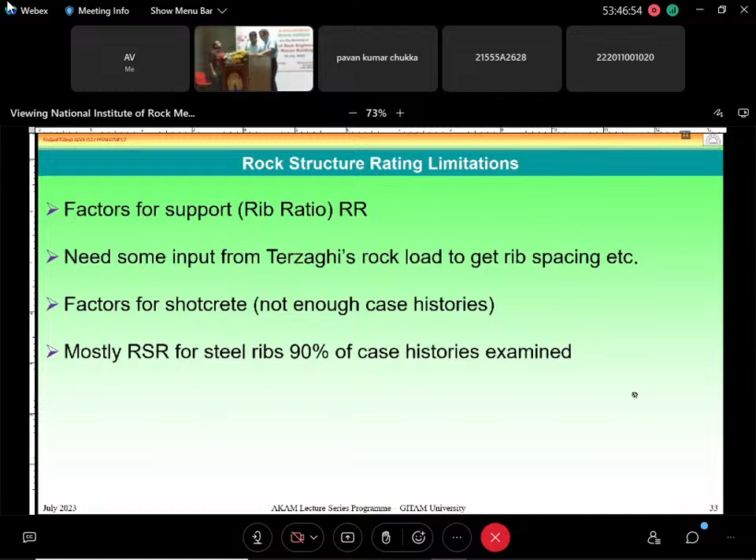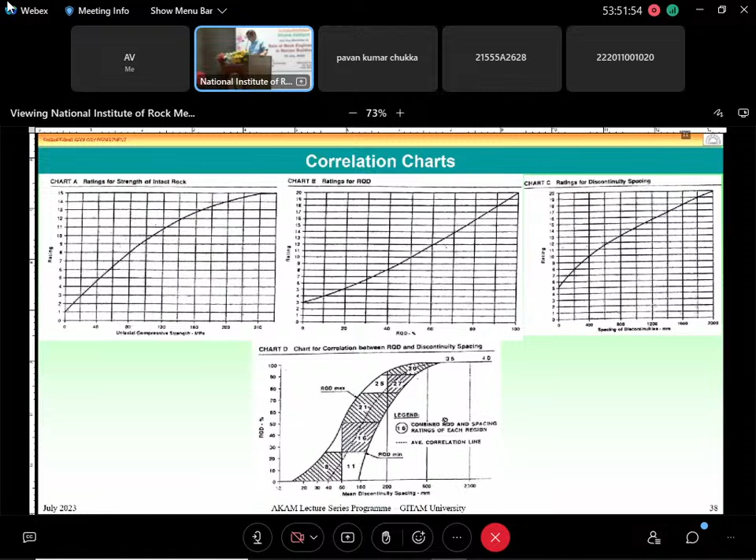So this chart I have shown you, how the rating is actually done - UCS rating, RQD rating, spacing of discontinuity, mean spacing and the RQD, how it is rated. And this is the simple meaning.

Suppose my rock is very good quality, meaning my stand-up time will be more. My stand-up time will be more, so my progress will be more. Meaning without support, I can have many blasts, many excavations without support also. As my rock mass condition is degrading, the support system will be more, my pull will be less, because this is a cycle. So how to increase this cycle?

In addition to that, the support for different diameters of the tunnel can be recommended based on the rock mass classification. So many organizations in the world, including many organizations in India, they are using this classification only for making their underground excavations.

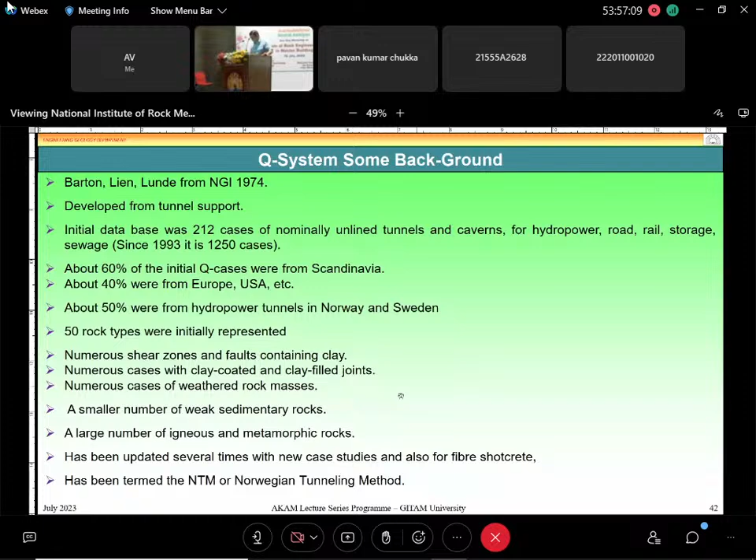And what I was telling earlier, the examples we were taking were mainly from the Scandinavian countries, mainly Norway. Now we have a lot of examples from India also, because this group, NGI - in the morning our previous speaker, Dr. Jhasa, told regarding this NGI, not only in geophysics, but they are very good in this one also. So there's continuous research, and if you Google it, you will get a free document published in 2015 regarding rock mass classification using the Q system. If you Google that, you can download it. That is around 60 pages, a very important document.

So actually they have proposed three quotients, and in these three quotients we have six parameters. The first three parameters are related to block size. The next two are related to shear strength, and the third one is active stresses.

So suppose if the RQD will increase, your rock mass quality will increase. The top parameter, the numerator, will increase, the values will increase, and your rock mass will improve. But in case of the denominator, if that value increases, your rock mass will decrease. So this is very important - you see, the physical parameters of the rock mass are taken into consideration. That is the first quotient.

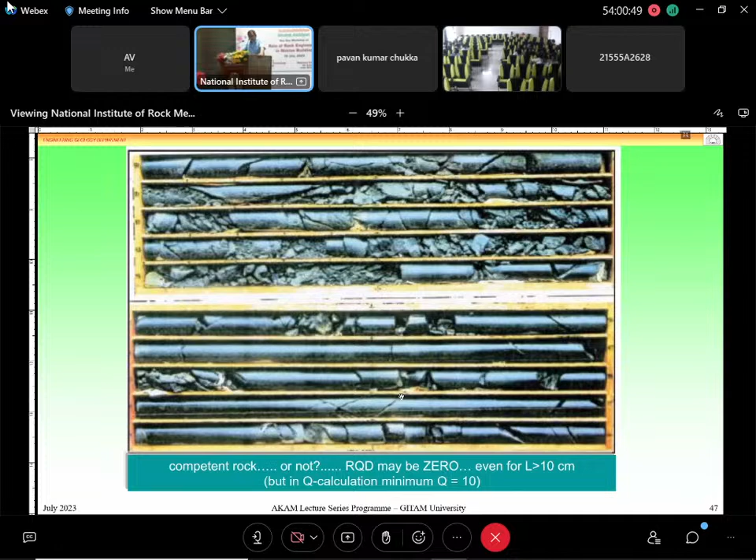This is the borehole log. This box is a box for the borehole log. Yes, the answer is yes, we can characterize this thing.

Again, this one parameter regarding JN, how you can go exactly - if you have some idea about stereographic projection, that is very much required. It is a very frustrating job, I tell you.

My honorable director told you in the morning, our job is not a white collar job. Why is it not a white collar job? Because a lot of the data, taking a final decision for the underground at 5 meters, for the nuclear power, 60 centimeters. People are asking how you are collecting the data.

It should be very clear that if you are taking more than 3 sets, then somewhere we are making a compromise with the support. If you are making a compromise with the support, it means we are making a compromise with the safety or the life of the structure.

So which parameter you should take into consideration, and which joint set you should not take into consideration, that has to be decided before taking a final call on this. So that is a brainstorming sort of thing within a group.

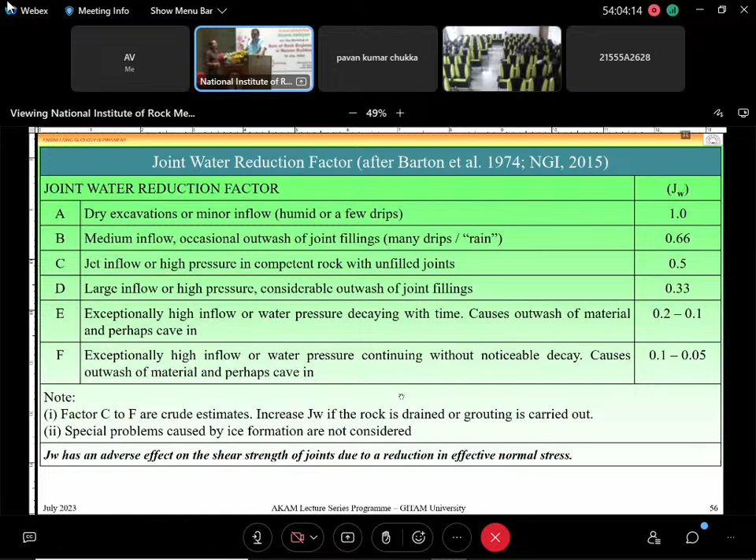A different pattern is there. For tunnel, how we can measure - a different pattern is there. So the problem will be, then how to give a rating for the groundwater condition. It should not be more, it should not be less.

Then the stress reduction factor - as I told you, 4 conditions are there. Out of the 4 conditions, only in the competent rock mass will engineers face the problem. In the rest of the conditions, the engineer or geologist will not face the problem.

So this is some sort of ratings given. I will not take much time. This is again the important parameter - how we have expectation that if not supported properly, we are going to have a daylight, meaning the tunnel will collapse completely.

So this is some sort of this thing, that how much area has to be protected - not only that area, but how much area has to be protected. It is defined in this, and this is the means which type of stresses, how it will behave for the slope and this thing. And as I told you, whether the rock mass can be characterized from the surface exposure - yes we can.

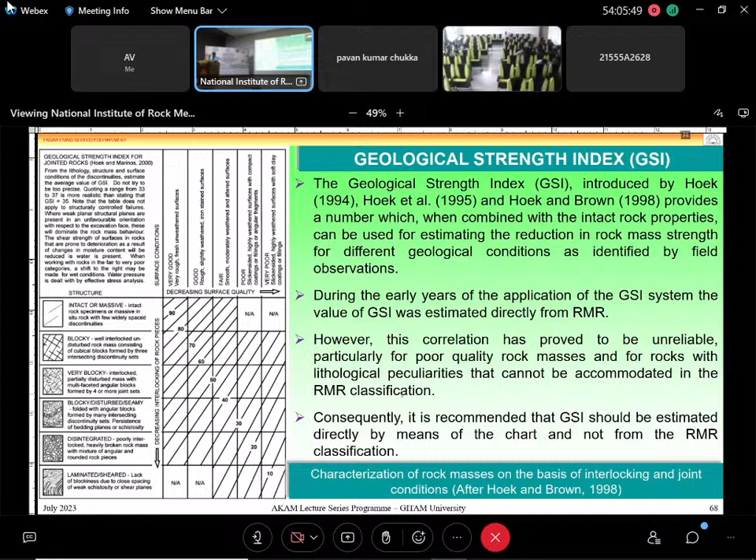From the tunnel, from the borehole, and from the exposure, we can characterize all this. GSI is one parameter which is shown as a graph, a matrix of 6 into 5 parameters. On the left vertical axis are the 6 parameters for interlocking and surface condition with 5 parameters. Using this 6 by 5 matrix, you can characterize and assign values.

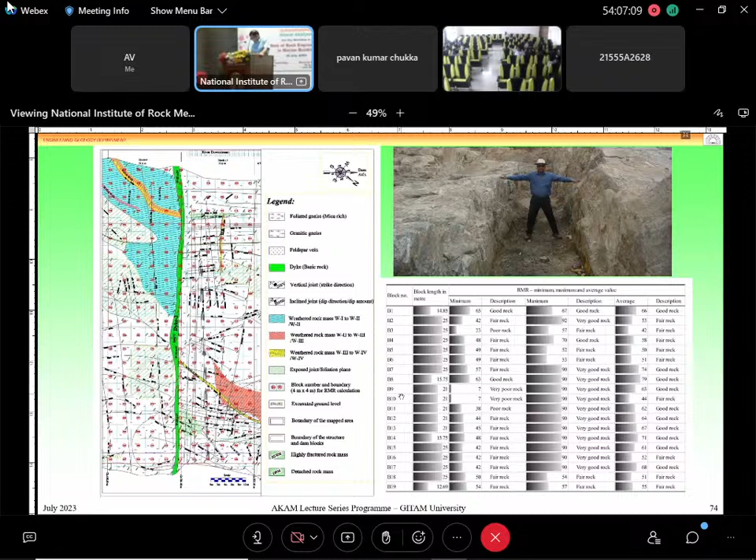So after detailed investigation, yes, it can be done. This is an example of the result of this whole exercise, which we call the as-built map.

This is the example of the Mangalore underground crude oil projects. For all 3 underground crude oil projects, our involvement was there, and finally all the geology and geotechnical details were compiled.

It may not be readable here, but what I am telling you is that every detail — which type of supports are given, thickness of shotcrete, length of rock bolts, spacing of rock bolts, location and type of instruments — all of this should be detailed in one map. So my planner and the reviewer will see only one sheet, the as-built map. Our organization does this exercise also after completion of the work.

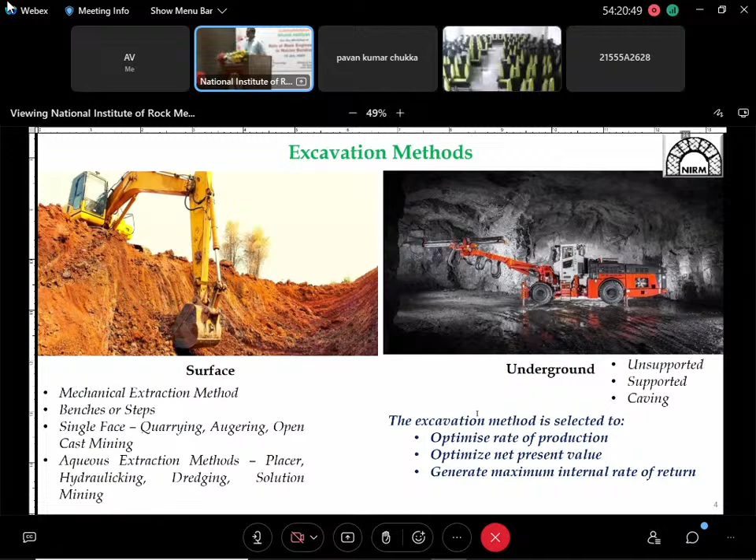Giving you a glimpse of underground excavations, how it looks like. Being mining engineers, they are more or less exposed to the mining environment, where we see a 3x3 drive, where a scooptram or LHD is used to load the material and transport the broken ore, and a drive where the support is installed.

Coming to excavations in the mining sector, India has huge potential, as my preceding speakers have already spoken about. Coming to stats, in the year 2021-22, about 18 gigatons of mineral production was done worldwide, out of which India contributed about 7%, amounting to a whopping 1.9 lakh crores.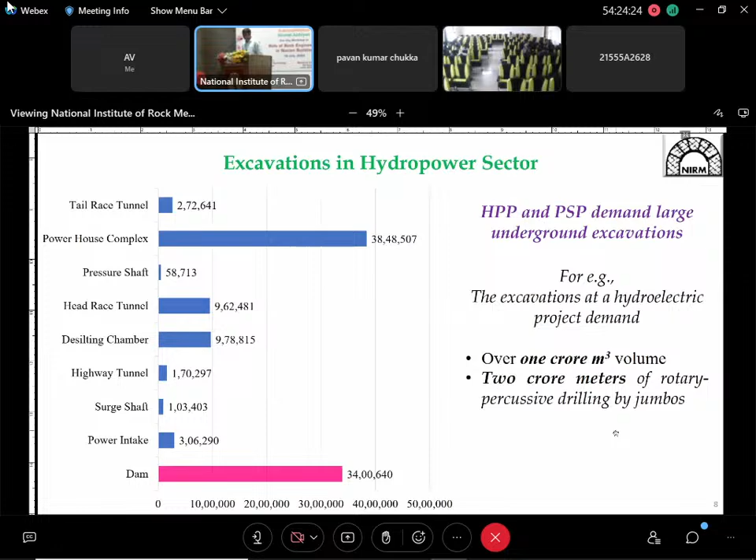So therefore we need to understand its mechanics. It is basically a theoretical and applied science of understanding the mechanical behavior when we apply some forces. Dr. Naithani has already explained about rock mass classification and characterization.

And sometimes we see that despite our best efforts in supporting the rock mass conditions, this also will not stand against nature—meaning the forces of nature.

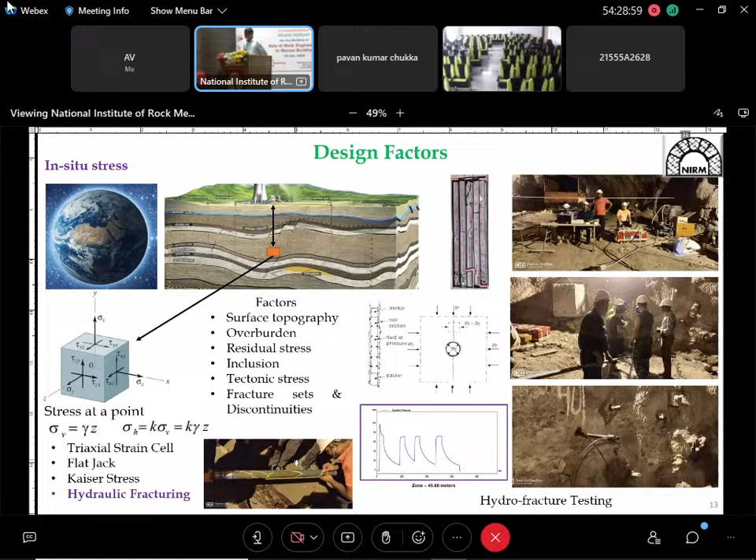So following that, we design our excavations, orientation, size, shape, etc. Second important parameter of any material is, since we are dealing with rock as a material, we need to know its strength and deformation properties.

So we need to have its compressive strength, uniaxial, be it triaxial, confined strength, be it cohesion, friction, shear parameters, and also some kind of deformation parameters like elastic modulus, shear modulus - we need to know it.

Testing in laboratory, like the way we deal with civil engineering material or any kind of steel, ISMB sections or ISHB sections, we need to determine its tensile strength and then its deformation, Young's modulus. In the similar way, rock is determined in the form of core, and then it is tested for determining its uniaxial compressive strength, tensile strength, Brazilian tensile strength, shear properties, and also the dynamic ultrasonic velocities - P wave and S wave velocities - which were previously discussed. Second one is rock mass structure.

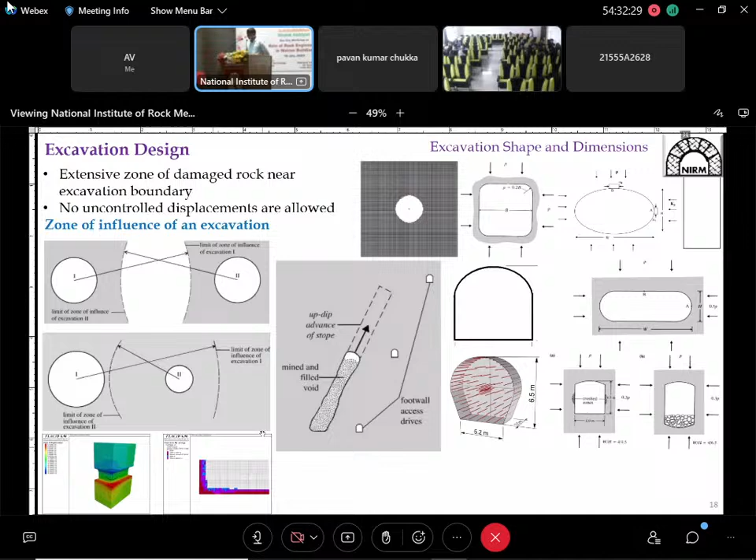Especially in rock mass, when we cut, it is not like a cake that we cut a slice and have it nicely, and then we can have a clean cut. It's not like a cake.

We also need to see the cause and effect depending on the sequence of excavations. In mining, we approach through a crosscut and carry out a blast, then progress in both directions until the slice is mined out. Here, excavation happens in the heading portion and then the benching portion. If there is very weak rock mass, we excavate it in two portions, half as heading and half as benching.

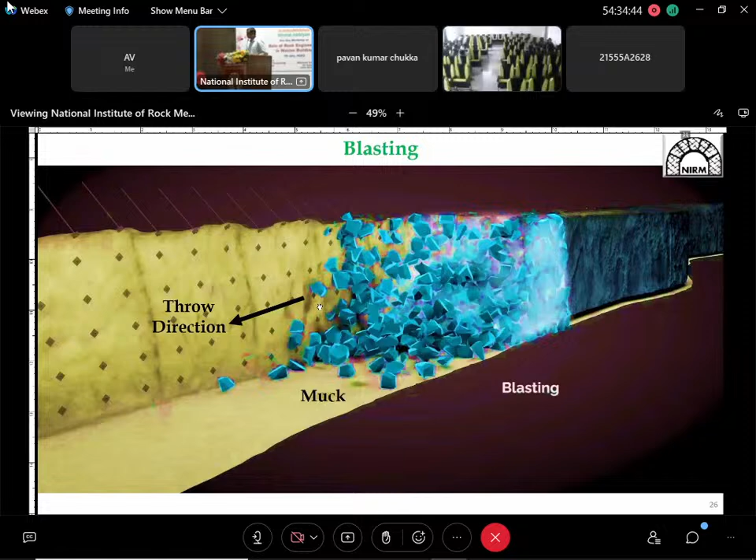We use a drill jumbo to drill the holes, charge them using explosives, and then blast. When we blast, several fragments are thrown in the free face direction, and the fumes are ventilated and de-aired. The blasted muck is loaded and hauled to a different point using an LHD, then we scale the loose rock mass over the excavations, spray shotcrete if required, and support the structure or underground excavation.

All these steps of creating an underground excavation result in accumulation of stress in the pillars, where the more the excavation, the higher the stress concentration in the stress pillars.

In order to determine the stress in such rock, we use numerical tools or numerical modeling methods, be it continuum or discontinuum, depending on the type of discontinuities we need to deal with.

Once we know the extent of damage, we go ahead with designing rock support. There can be two schools of thought: one may think who needs to put a rock bolt when we are going to mine out and leave, while others think why take any chance when we are going to work here. We have to judiciously strike a balance between these two schools of thought and come up with a proper support design so that any discharged or dislocated rock blocks are retained in their original position.

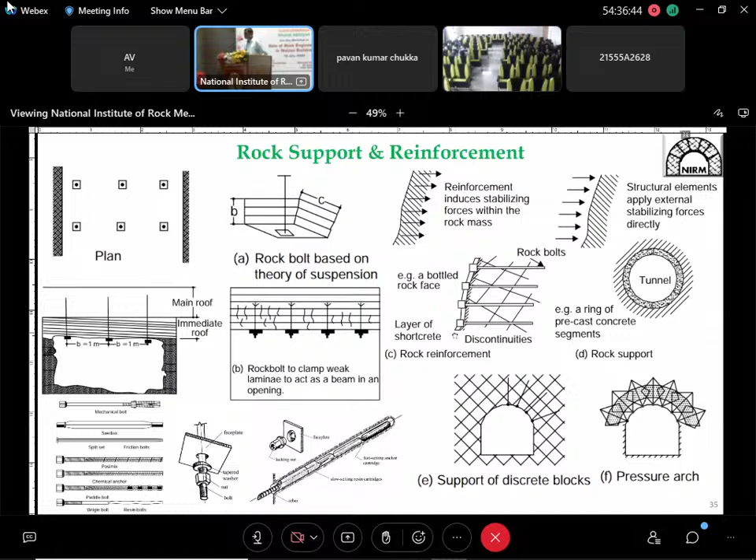We spray shotcrete so that wherever there was minute or fractured material, it can be withheld at its own place, and it also gives a cosmetic look.

Once everything is done, we need to monitor. What exactly do we need to monitor? Unlike engineering materials like steel or concrete, rock material is different, with a lot of uncertainties. We need to monitor various engineering parameters such as displacement, loads, stresses, strain, seepage, pore pressures, temperature, uplift, seismicity, and so on. But ultimately all these parameters boil down into two: displacements or deformations, and loads. But how do we measure these?

This is done through instrumentation. A successful instrumentation program starts by questioning: if we are putting an instrument there, what is the purpose of it, and what are we going to get from it? Which parameter are we going to obtain, and what does that value imply? As an engineer or designer, we need to know that if the value is such and such, what step we need to take.

So that instrumentation plan is the basic requirement of any excavation project, so that its performance of such kind of structures can be monitored. This basically has a sensor in it which responds to the changes in the variable being monitored. So if we apply some load somewhere, some deformation occurs, and that deformation is the parameter which the sensor detects.

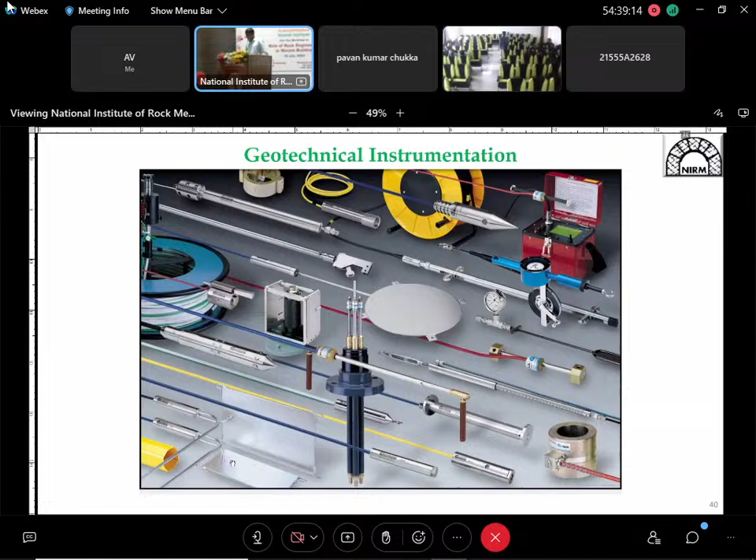When it comes to tunnel instrumentation, we have seen underground metro stations development, where 30 meters or 50 meters down from the major working roads are being excavated. In such scenarios, various instruments are actually installed, such as load cells for monitoring loads, extensometers for deformations, and along the beams we also monitor strains in beams and columns using strain gauges.

So all these instruments will help us in determining the value. It again depends upon the designer or the person who is reading the data, as to what exactly it means to us.

The key monitoring applications in underground mines include settlement like surface subsidence, deformations, loads, displacements, and we use certain instruments like extensometers, convergence meters, stress meters, etc.

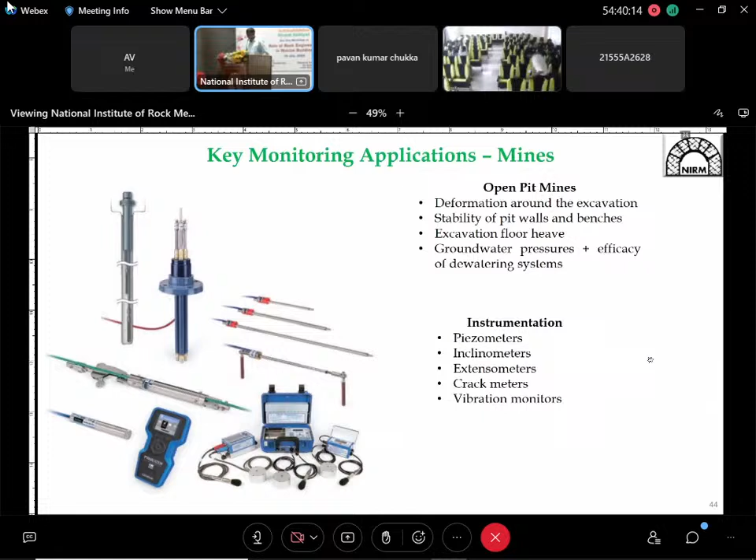Similarly, in open pit mines, we see the deformation around excavations, stability of the pit walls, groundwater pressures, excavation floor heaves, and for instrumentation we use inclinometers, piezometers, crack meters, etc. And in mines, similarly, tailing dams are also there.

In tunnels especially, we monitor the convergence, displacements, and floor heaving using various instruments. And then finally we use data loggers to acquire the data, and the data is analyzed.

Because we are, after all, in the era of artificial intelligence, machine learning, and deep learning, we always try to acquire data. But ultimately, what is that data trying to speak to us or convey to us? That's a big question mark, which needs to be addressed by the engineer who is actually designing the process. This is a process of evaluating the data through analytics and statistics for discovering useful information that can aid in sound engineering judgment.

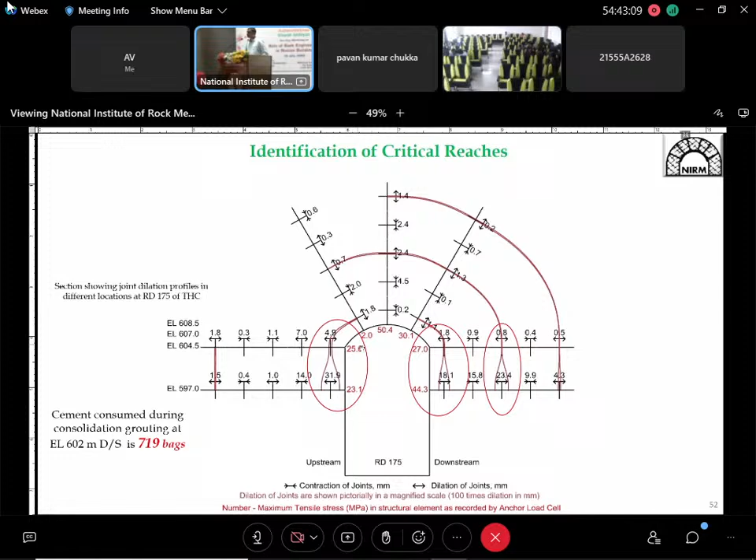This implies that instrumentation has a very huge role to indicate critical reaches. We monitored the structural health between the pillar separating the two caverns, and could identify the damage zone, and designed remedial measures accordingly. This detachment can also be physically seen at site in the form of bulging and cracking in shotcrete.

Sometimes this cavity can be as huge as 45 meters by 90 meters, equivalent to a 30-storied building. So we can imagine what the way would be to monitor these kinds of cavities, because in underground caverns or excavations, once these cavities are encountered, we have to deal with it, otherwise the project is stuck. There are several instances across the globe where projects are halted and stopped because of such cavities, and we are unable to deal with it.

So this is a very important aspect in underground excavations, where a cavity monitoring system was inserted using a borehole up to a depth of 150 meters, into the cavity above the downstream surge chamber - this is a cavern, and it was monitored using a cavity monitoring system. This system is a LiDAR sensor, which we drop down to a depth of 150 meters to determine the shape, size, and volume of this cavity.

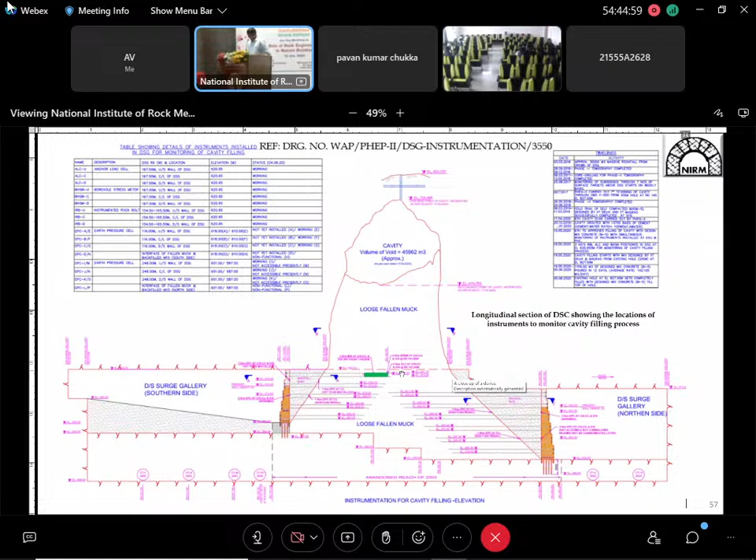So here we designed an indigenous setup of instrumentation network to install inside the muck. These instruments are not suitable for every case - we can't just get one instrument, fix it anywhere, and get all sorts of data. That's not so. If a project demands certain data, then we need to devise our instrumentation in such a way that we acquire that specific data.

So this is one such attempt made in that project, where an indigenous product was developed using a load cell and borehole stress meter, where we get the loads and stresses, and also the strains in the rock bolt can be determined. This was drilled up to a depth of 30 meters inside the muck, and then installed. We can see this is the life of a rock engineer.

The blue collar job, so called, hard hat job, so called. It's not a white collar job, but if we develop a passion in this field, we definitely feel more interesting doing such activities, because this is real data that we are generating - not through some algorithm or random number generator sequence. It's real data obtained from the field, which will be utilized by a computer science engineer or an AI ML expert to predict the future behavior of this material.

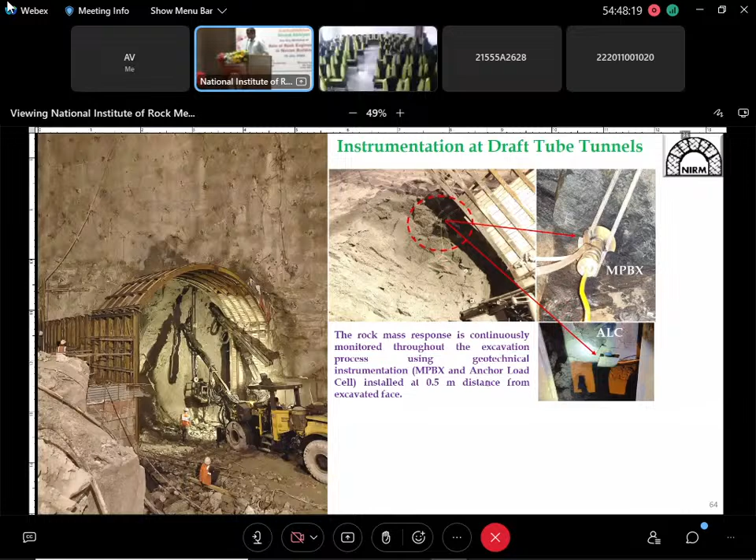And instrumentation also, the installation of instrumentation could be made possible at a gap of about 0.5 meters. Again, this credit goes to the blasting department, so as to design their blasts in such a way that they did not damage our instruments. So this has also served us in a lot of controlled manner.

So this exercise is also carried out for each stressing of anchor, and also some kind of prism targets are used to monitor three-dimensional deformations.

And numerical modeling, as mentioned, actually gives us a picture of how the caverns behave when certain collapse occurs, to what extent it has its failure or yielding limit, or the stress redistribution. All these things can be evaluated or assessed only with the help of numerical modeling.

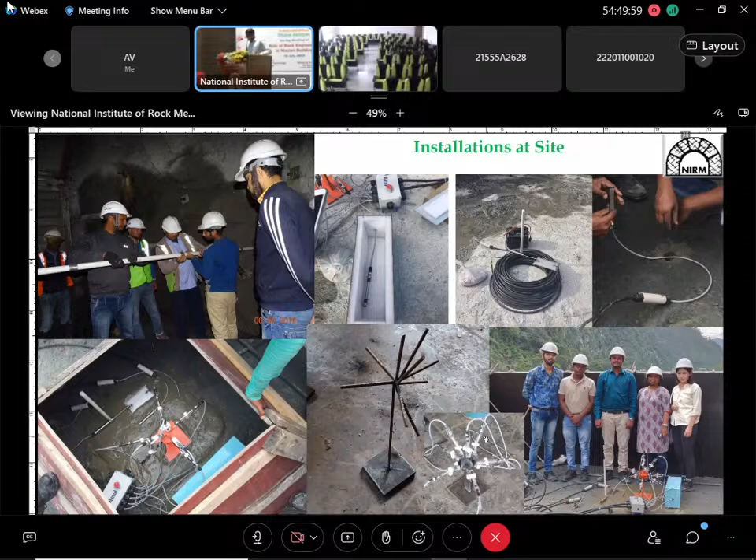Some work was also done in drifts of dams, where MPBX were installed, that is magnetic ring MPBX, and also some temperature sensors, strain gauges, and stress meters, concrete stress meters. And this was another development done by NIRM, a three-dimensional strain gauge meter, developed to serve the purpose of monitoring in concrete cells.

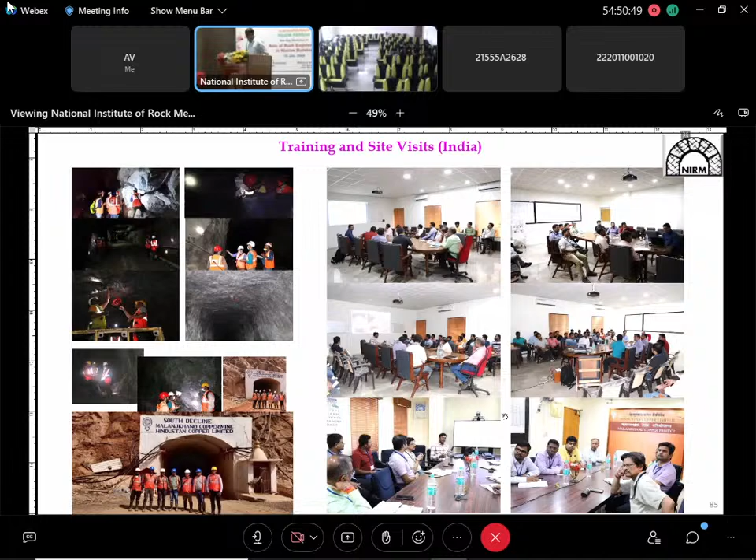And all these are actually deliberated with the students and the engineers and the professionals from the rock engineering fraternity in the form of training and site visits, both in India and abroad. Thank you.

I guess everyone is eagerly waiting for this moment, right? Okay.